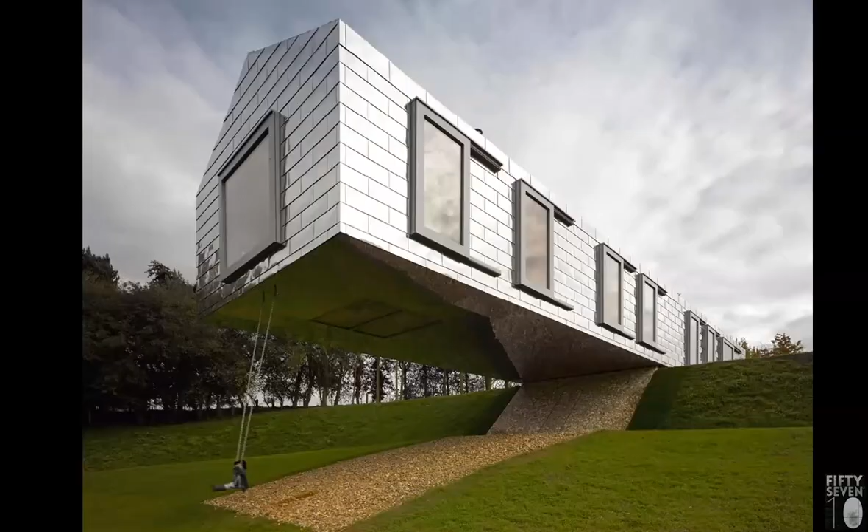Later, we turned social housing into something really good looking, perhaps. You could also say this is for Miami, but it's in Amsterdam, one of the worst neighborhoods, as a transformation project. We work on all kinds of scales, also really small - like here, this is one of only two things we've built in Britain. One is still standing, and that's this one. It's a holiday home for Alain de Botton, to actually get people that go there and rent it out. You could go there, rent it out, and you're supposed to talk about the architecture. We believe that this would actually cause some discussion.

We do public buildings as well, and also large-scale master plans. We also do interiors and gardening. So like you at the university, we have this idea that architecture should not specialize too much. It's really difficult in getting new projects, but we also believe that you can do anything from a vase to actually restructuring the entire planet, which was one of our more modest projects.

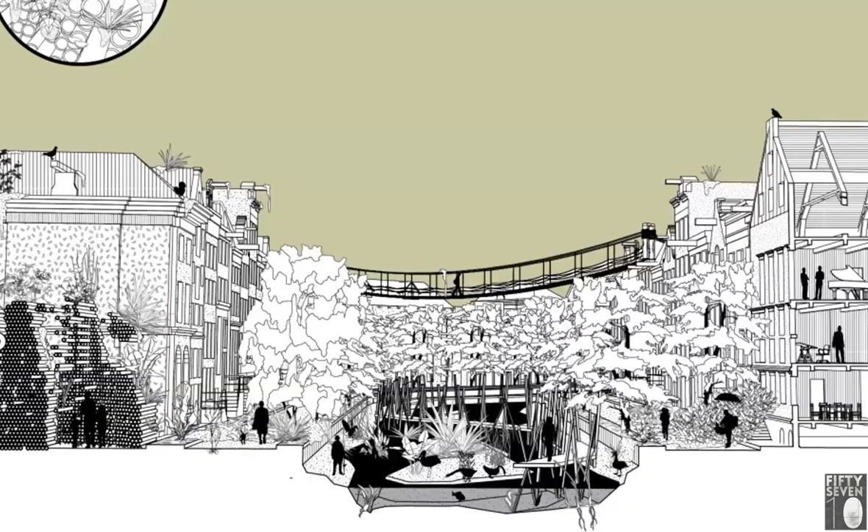We also run a university department at University of Delft. We call it the Why Factory, and they're dreaming about the future of the city. It doesn't have to be rational, but it has to be radical. So here, for example, is a project that wants to make Amsterdam a biodiverse city, with as many species and animals as possible together with humans.

We also publish books, and you can perhaps find them in the library. In the 90s, we grew up with this idea that resources are going to end - the warning of the Club of Rome, which is more relevant now than ever. We also knew that we were running out of space and resources, so that if we all would live like Americans, we'd need our planet many more times. In a very Dutch way, we then said, okay, let's not - in Germany, they always tell you we need to do less. We always want to do more, and perhaps in a better way, because otherwise it's not very optimistic, and we want to be optimistic.

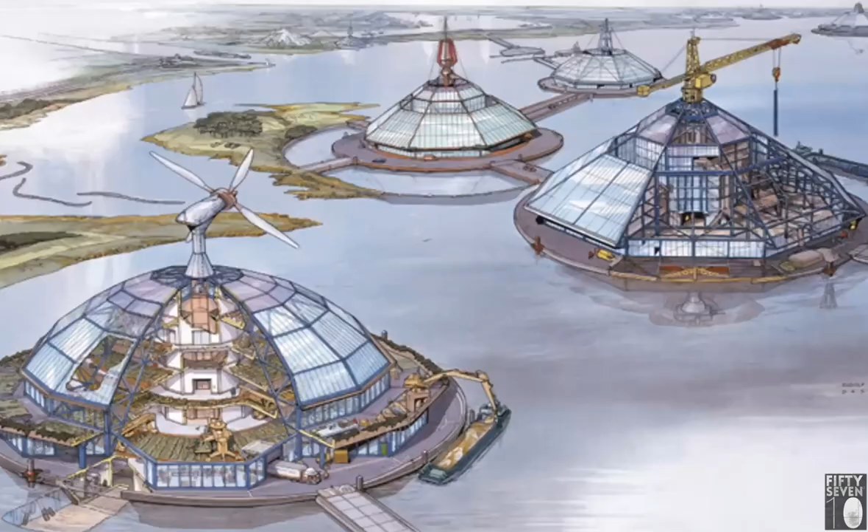In the Netherlands, we have this idea that you can shape society. We have built our own country, and these are two doors that actually protect Rotterdam - each door is as big as the Eiffel Tower. So there's a very strong belief in solving things with technology. Winy Maas, the founder of MVRDV, actually grew up with these visions of the future, that in the future, if the Netherlands are gone, we would all live in floating cities. So there is a strong belief that architecture can shape things and society.

And people live like this, and we believe this is a really bad thing. So sometimes we're a bit naive, and we want to put those two conditions together: suburban lifestyle together with density in the city. For many years, that was also our philosophy in terms of sustainability, because urban sprawl is extremely bad.

And if you have dense cities with high quality, you actually have a more sustainable city. This is the pavilion we built for the Netherlands in 2000 at the World Expo, a stack of Dutch landscapes. We tried to prove that you can create nature in an artificial way, like the Netherlands. On the 5th floor we have a forest. After the building was abandoned because of bad economy, the forest grew there for 20 years without being maintained. So it actually worked, and so you can make density also nice.

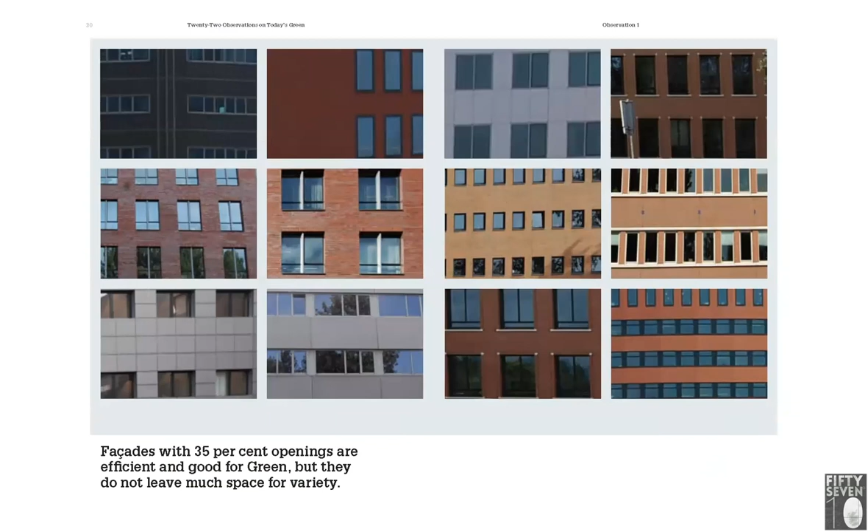You could have parks in your buildings and so on. Also, about sustainability, we have a publication called The Green Dream, saying that green buildings are often quite ugly. Here, for example, in Germany, you see this is not going to be loved, and it's not a good way to do it. Also, if you have only 35% facade openings, the buildings do not become more interesting or better.

So here we are trying something about beauty. Can you make energy production actually beautiful? These water lilies could be floating in Phuket—is it beautiful enough? We also dream about cities that are literally covered in forest, and that's not greenwashing, but is actually for biodiversity, to make it nicer. Here is a vision for Munich, which is now hanging in the mayor's office.

So we're dreaming. For us, sustainability is not just technology, it's really holistic. It's like water in a stream—if it cannot pass the stone on one side, it will pass on the other side. So every project needs to be really sustainable, but the way to get there is not one recipe. You have to find many things.

Here I show you one. For a dock workers community in the port of Rotterdam, we had to design a library, and we said: okay, this needs to be a place where the book is celebrated and advertised, because it has the highest rate of people who cannot read in the Netherlands. So we wanted to make a pile of books saying, come and read. And so we built the book mountain.

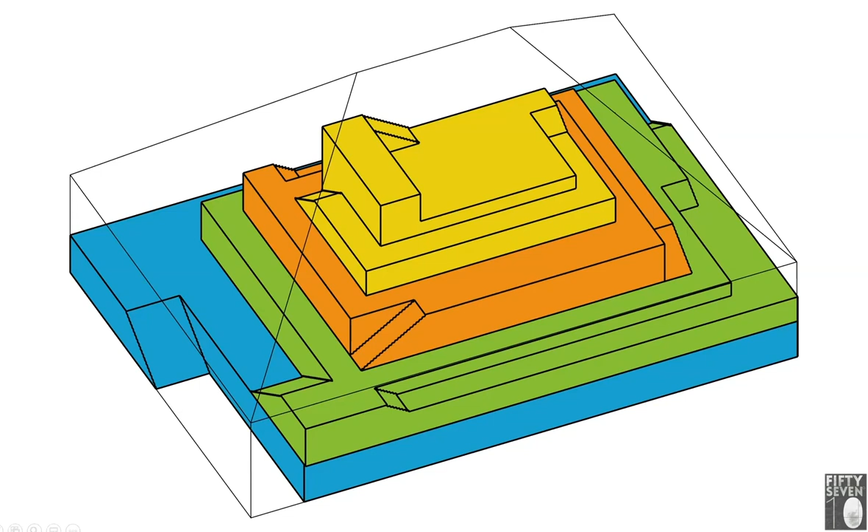We only have one entrance, and when you enter the building, you instantly have to take the stairs to get into the library. So that's the concept, and this is the book mountain as it was built. Sustainable technology is in there everywhere. Also, the bookshelves are actually made out of planters from the flower industry.

But the most important thing is actually that it's sustainable to the community, and that people are reading more. And it works very well. Many kids who don't have a home where it's quiet, because the television is running all the time, go there to do homework, and that gives them a chance in life.

And then, of course, it's filled with technology, and even the plants you see in the building are part of the sustainability. Basically, we harvest heat in summer and harvest cold in winter, and then use it to cool down and heat the building, which is a very simple and effective way. The system doubles also as a sprinkler—if it burns, in winter you'd have really hot water coming down, and in summer it would be cool. But we try to make it all disappear.

So the idea is not that it's a building where you see the sustainability, but here you need to see the books, because the books were the entire idea here. Also nice, the moment you walk up, you always have books around you, and we try to manipulate you to become this person that is interested in books while you are walking to all the other programs also in the building.

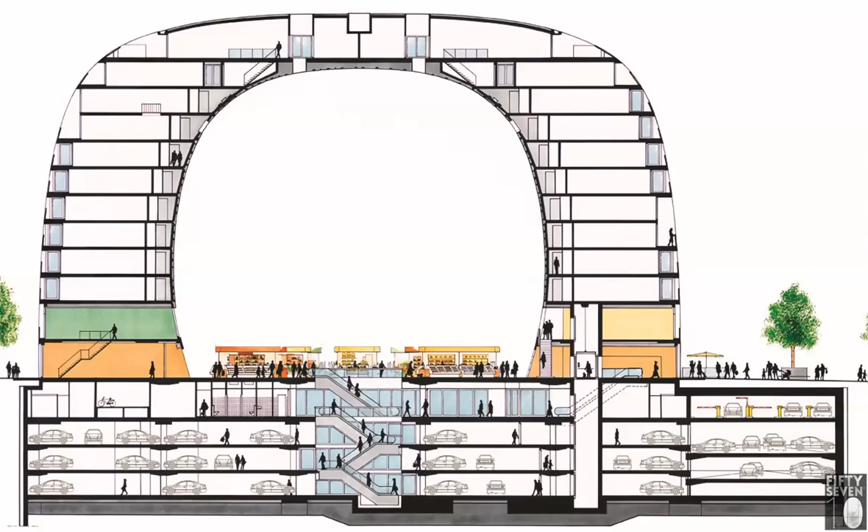So here, for example, we have one of the rooms that is looking into the market. The further you go up, the more the wall is at an angle, and at a certain moment you look down into the market. It's also mixed because this is actually social housing - 50% social housing, 50% commercial housing, and then 30 rich families on the roof, which is how things are as well.

Of course, we have BREEAM very good, but that's not even the best rating. It's not the best rating because we had to put a huge parking garage into the basement to actually relieve the entire neighborhood from cars. But the thing is that it's really loved, and if a building is loved, you have less chance that it will be removed.

And of course, in Scotland, you know all about it - I just read that Edinburgh has the most listed buildings in the world. Not building something is of course the most sustainable thing, and if you do not demolish it and you do not replace it, then it's also really good. So that is also in a way important.

Yeah, sustainability - if you leave it up to the market, which is a very British system where everything needs to be left to the market, it might not happen. So you also need very strong cities. Our politicians are asked to actually come up with good rules so that we will turn everything more sustainable.

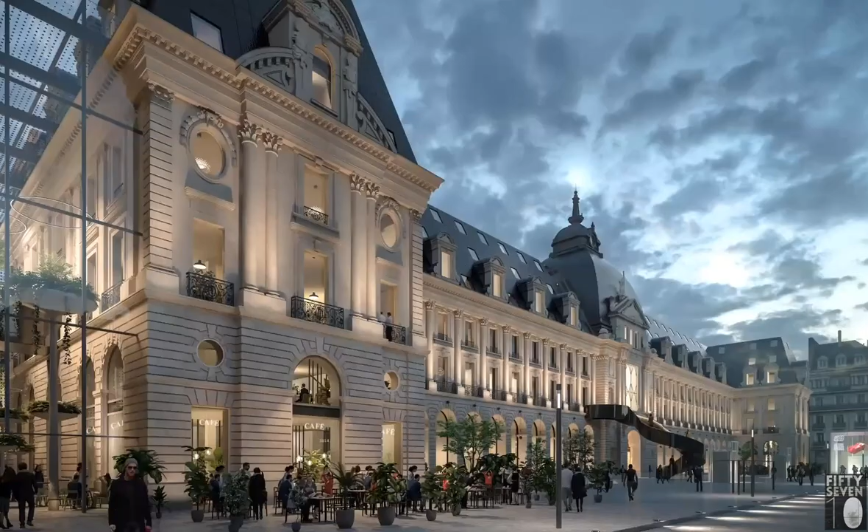And what's also important in our strategy for sustainability is transformation, transformed in one way or the other. We're trying to do that sometimes totally invisible, like this building in France, where we're not supposed to really touch it. So we touch it a little bit with some glass, but you won't really see that we did something - whereas it's perhaps more a challenge and more interesting for architects to look at this kind of structure.

Going back to this building, it was empty for 20 years, and whenever I went there, there was more decline, and more architecture students actually went through the fence. It was heavily forbidden in Germany, verboten everywhere - do not go here. So sometimes I came in there. There were two buses with architects in there, and whatever they did with the fences didn't work, the architects would always go in there.

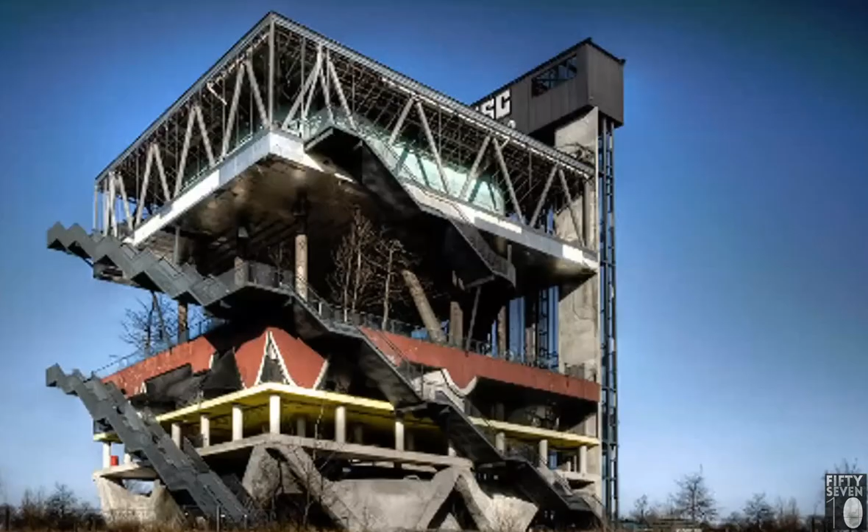So this is how it looks now. As you can see, it had its best time, and also here we were asked to actually make a plan for it. Because it's very expensive, we had to design student housing around it, and that would pay partly for the refurbishment of this building, which will be turned into a university quite soon.

And then, yeah, it of course needs now a facade. In the beginning, it didn't have a facade, but yeah, you need to change buildings.

Also very important, and I think this is perhaps the most meaningful participation we do in terms of sustainability - we work a lot in China. We have 55 people working on Chinese buildings, and of course they have built so much over the last 30 years, and this stuff was built fast and bad. If they start to demolish everything, then global warming will accelerate even more. So what we're trying to tell the Chinese in all our modesty is, please have a look at these structures, whether you can save them.

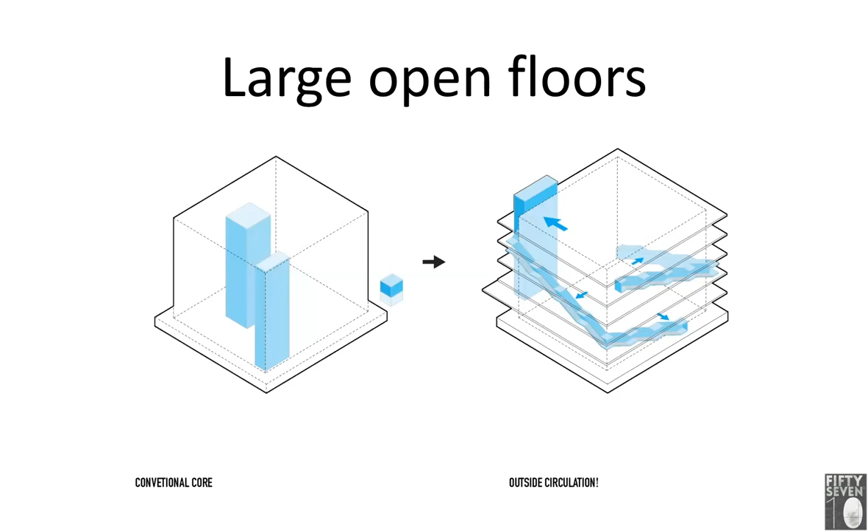Well, we were also only allowed to have 5 floors, so we made 5 double floors, and so you get a lot of light into these floors. And then we said, well, the tenants can then decide by themselves to put in furniture, which is actually, you know, mezzanines and so on. We called them the potatoes, because there was this potato powder factory there before.

So how is it used now? We have gastronomy, we have 3 layers of fitness, then we have an office - the Audi Innovation Center is in there - and a short stay. Basically there is this penthouse for DJs, because they can really have after parties with a lot of noise and nobody cares in this building.

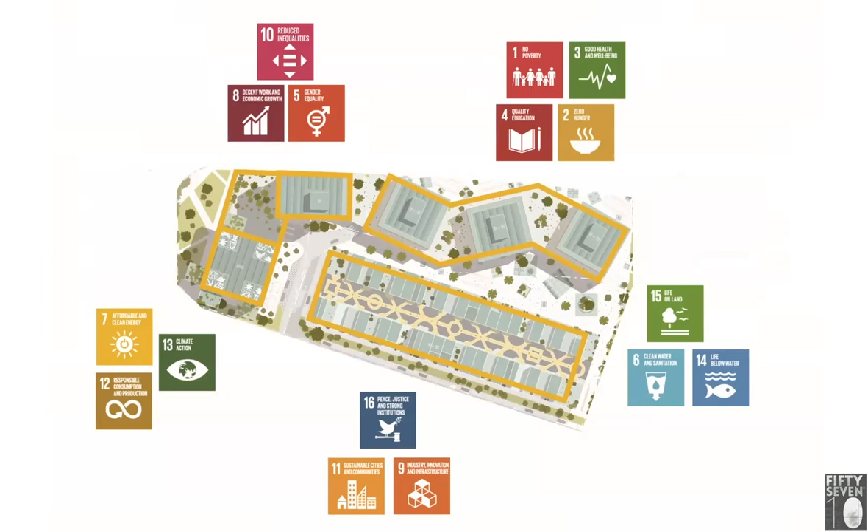Of course, we need to look at the 17 SDGs. Maybe you're working with them as well, but we're trying a lot. We have developed these toolboxes so that everybody in the office can see what they can introduce into the projects. We have all these certificates, but they're really not enough. So we're also looking into a climate pledge. We're testing whether we can offer more, whether we can promise more. If our tests are successful, then in September we'll roll it out and make an official pledge to the public saying that we will be more and more sustainable every year and exceed these labels as well. But at this moment, we're still in the test phase to see whether it's going to work.

Carbon is the most important thing, and all the other things you see there we're trying to put into the buildings. It's not always easy because we work all over the world, and sustainability in Sri Lanka means something very different from Germany or France. So that's also something where we have to be super flexible.

In order to do that, we have these software people, a bunch of guys - the first girl is now hired finally - architects that are also really good with software, and they're trying to help us along.

Here, for example, you see the Space Finder, which is super interesting. It deals with urban regulations and the potential of buildings. Can you do something to them? Can you densify them a bit more? So we want to go from these set rules in the city to perhaps more flexible rules.

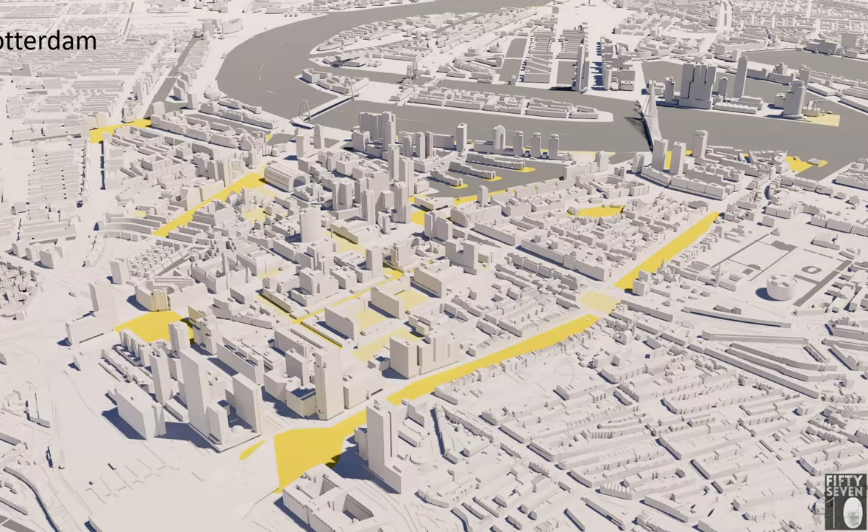We used Rotterdam as an example - this was the first test. We put the entire city center of Rotterdam into a computer model. Then you see in yellow the sunspots - these are all places in the city center that have a right to a certain amount of hours of sun. Then we look at the maximum height and volume that you could build, which is this.

According to an urban regulation, this is what you can build. But then another urban regulation says that you cannot have that shadow on the streets. So our software mediates between those two regulations and three other regulations as well, because we like our rules in Holland. And if you fully respect it, you see that we can still build a lot on top of these plots.

The plots where you can't build at all are all listed - that's where our market hall is, and we said let's not build on that. But it's really interesting for developers because they can see which plot actually has potential, and it's interesting for the city to check whether the rules work.

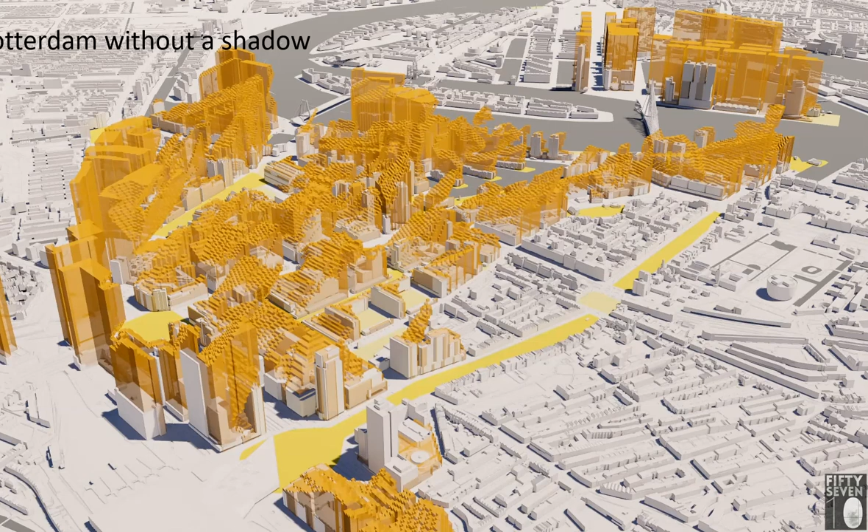When we showed this to the city, they were shocked that on the top part, where there's the word shadow, there is a mountain of buildings - and that's certainly not something that they wanted to do. So here you see high chances, low chances, and so on.

Another one our next team did - next is new experimental technology - is looking at carbon. Normally you make a design and then send it to an engineer, who then looks at the carbon use in the construction process and the maintenance. What we're trying to do is bring this further into our design process.

Of course the SDGs - three of them are the most relevant for architects, we believe: 11, 12 and 13. And 13 has to do with carbon. Here we look at the use of carbon - usually the carbon calculation comes way too late in the process to actually change anything, so we have to live with the design but find lots of things to make it better. Whereas now we want to have a prediction very early on in the design process, because we make many design options, and then we can also discuss how carbon works.

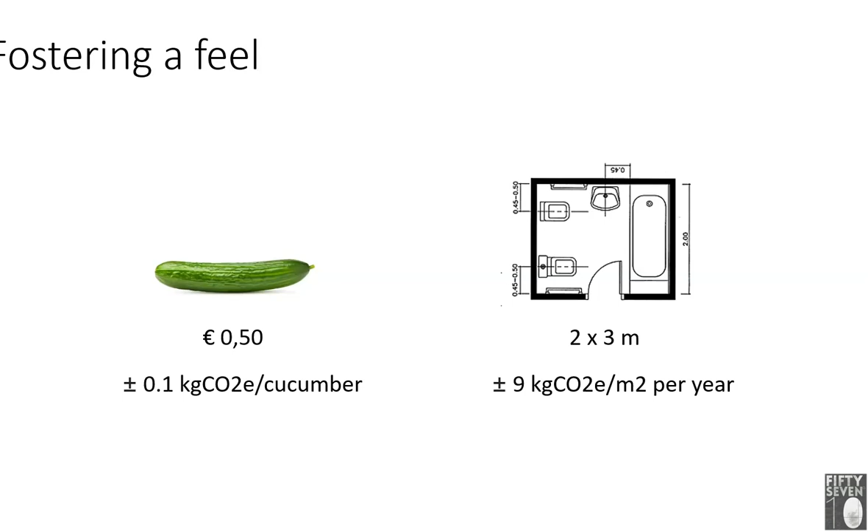So here, if you have this, now a bathroom, so much carbon a year, a cucumber, that much carbon - we know these things. So we put that into a software, and we are looking at the very beginning of the design process, the construction process. We then look at different buildings that we have done in the past and that others have done, and different elements and how much carbon they need, and also different materials. We put all this together, make our models, and look at all these parameters, and the software comes up with an estimate.

The estimate is a bit fuzzy, but it gives you a range. At least it gives you a range, and you can then see if option number 1 is better than option number 2, because the range is going to vary between these designs.

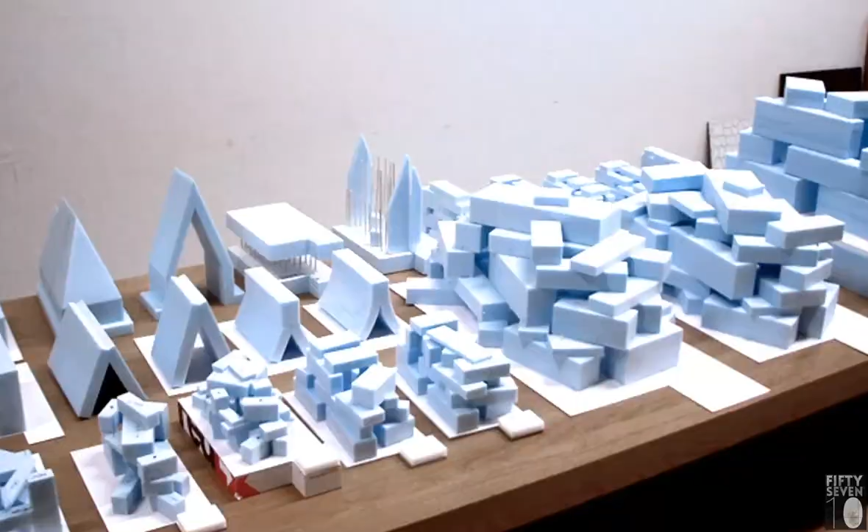Here you see a table of our early design phases, and as you can see, it can go really any way. We have here maybe 3 main ideas, 4, 5. But in the end, the stack actually did win, and for the stack in front, you see many different options. So we have a lot to discuss, and we used to discuss this based on all kinds of other qualities, and now we can also automate it. We can give each of these options a carbon label, and that can be also on the table then.

Yes, I want to talk a bit about the city, and I want to start really small. Rotterdam is the city that was bombarded during the Second World War and then rebuilt as a car paradise. Recently the city has decided to give less room for the car. So they built lots of parking garages.

One of them was in the market hall. That's also the reason that it has a bad rating, because it has 1,250 parking spots. So every one of them is a minus.

And this is the neighborhood where our office is. During COVID, they were sitting with this - you see, it looks like a parking space. There was no life left, and the shops would all suffer from this situation.

So they asked us whether we could remove the cars and turn the street into a pedestrian zone, bicycle zone, and also extend the shops onto the streets, which we did within 3 weeks. It was done. Also the city liked the idea. And that was a very new thing - that the store owners who normally want as much parking as possible said, get rid of the parking because we need more space. That was a very nice thing.

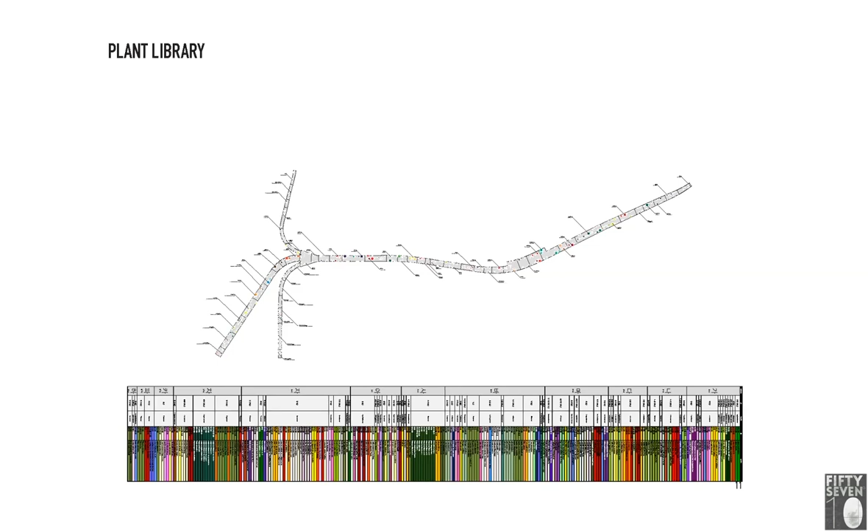The car is of course often a real problem, also here in Korea. We had this inner city motorway—it was crumbling, so it wasn't safe enough anymore for cars, but it was safe enough for people. So we renovated it, and within half a year we were able to turn it into a park. We did that with a lot of data, so there was scripting involved again. We have from A to Z in the Korean alphabet all the plants that grow in Seoul, and we put them into planters because the bridge wasn't strong enough, unlike the High Line, which is a very strong bridge that can hold half a meter of earth. We couldn't do that, so we had to work with flower pots.

The buildings on either side of this park changed in value, because there used to be this idea: more cars, more value. But today we know that in certain places, if you have more people walking, you have more value. This is the amount of money invested into the bridge as a park, and then this is the amount of money these buildings actually gained in real estate value—that's something that's really great. We also saw, for example, in the center of Madrid, that if you get rid of cars, even the turnover of the shops could go up.

Now, can you also do this on a larger scale? Because of course it's easy to do this in an inner city where everybody can come to. Oslo is one of these booming cities in Europe, with a lot of new people moving there, and they anticipated they needed a lot of new infrastructure to deal with this. They asked us to come up with a vision, because we were planning a super big development for Norway—360,000 square meters of mixed use, which is as big as one building in China. But for Oslo this was a really big thing, and they wondered how they were going to deal with all the traffic that would be attracted here. That's not the kind of city that we want.

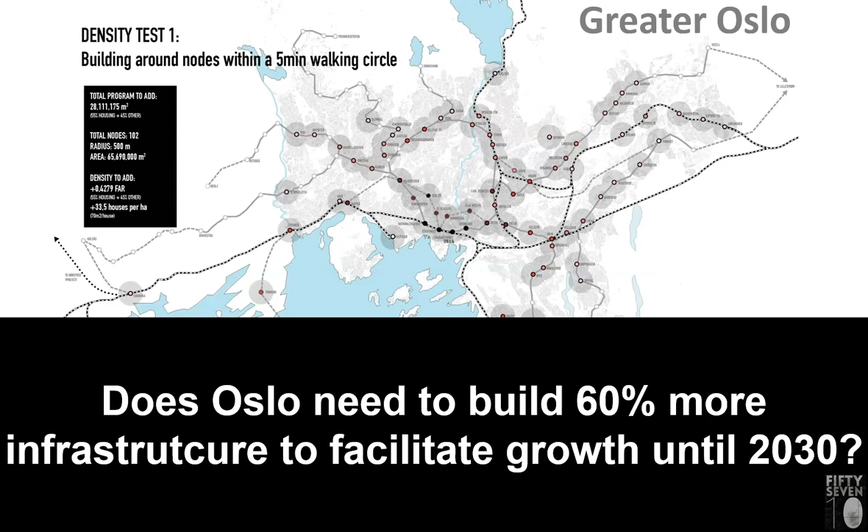And what we then found out is, now we looked at all these metro stops - is there any space left? We made about 30 different researches into metro stops. The circle is a 5-minute walk around it, because that's the hottest area to densify. And here we found, for example, a river that was not so nice, and you could perhaps densify there.

We made all these different ideas for the city, and then it's a decision of the politicians whether they want this. But at least we said you could do this if you can find the citizens to be on your side, because on one hand, the neighborhood might become more densely populated, but that also gives more services. And on the other side, the city doesn't have to invest. It could host 1 million new citizens without investing into new infrastructure.

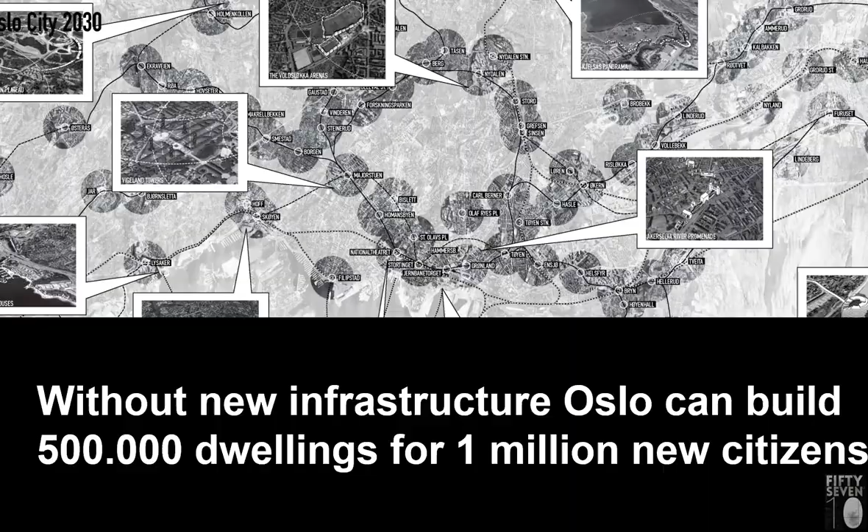And we tried to do something like this also in Glasgow, but that was very, very difficult. Because most of the streets are not even something the city is allowed to talk about, because it's kind of national roads. So pedestrianizing even one street, putting trees into one street in Glasgow is almost impossible.

And we had this Your City Centre project in Glasgow. At a certain moment, we sent this big letter to the mayor saying it is impossible that a big city like Glasgow has only one person working in the urban planning department being responsible for the entire city center and has to facilitate investments. So there was very little - we felt, from a Dutch perspective - interest in the public good, and a lot of interest thinking that if you attract investors, it's good enough.

So there is a faith in the power of the market. Even in Scotland, we were quite surprised. But the project is still going on with one of the offsprings from our office. So there is still hope, and hopefully it will one day look like this.

Because I walked through Edinburgh this morning, and you have all these gorgeous buildings, all listed, and in front of them are nothing but cars. It looks like a Morrisons car park. And it's like, really, is this how you want to treat your city? That's really sad in a way, no?

And many places have done better. This is a wonderful piece of inner city in Lyon. Here we also said goodbye to all these car parks and tried to give it back to the citizens, turning this into much more also shopping centers that don't just absorb people, but that you can actually walk over the shopping center instead of having to move in there and turn eternal loops until you forget where you are.

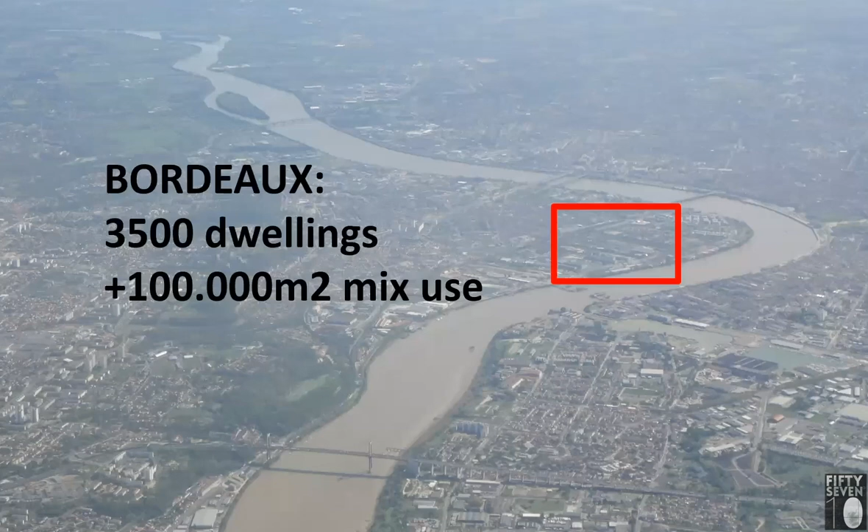So here, for example, I take you to Bordeaux, which is a UNESCO World Heritage City. On the other side of the river, there are old factories, and the city wanted to plan 35 hectares, 3,500 units, and a lot of mixed services. They have tried this before and didn't really succeed.

So they were able to build this, and it looks a bit suburban. People don't really live there, they sleep there. So how could we turn this into a better neighborhood? We have lots of old buildings there.

Bordeaux has already tried to build the city of the future. It didn't really work out. It looks really cool, though - you should go and visit it. The problem there was that the pedestrians and cars were strictly separated from each other, very noble, but the pedestrian areas lack all kinds of social security and feeling.

Now the old city is really good again, and when they asked us to plan the new city of the future, they said, can you please put the qualities of the old city in there? So that was the idea.

Then the first thing you do, if you play for God, you don't just look at maps, but you also go there, you talk to the neighbors, and that's what happened there. Winy went there and he actually drank tea with everybody. Then we had lots of events asking the people, what do you want? What are your ideas? And so on.

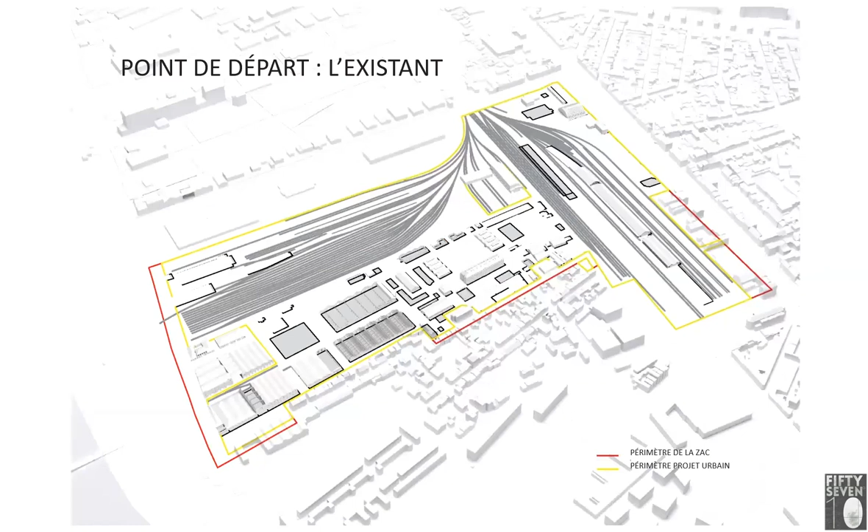Here's the site in Bordeaux. It's two old container stations and barracks from Napoleon. It was closed for a long time. And we said everything on the site is holy. You can never remove anything. So that was the start. Do not remove the history.

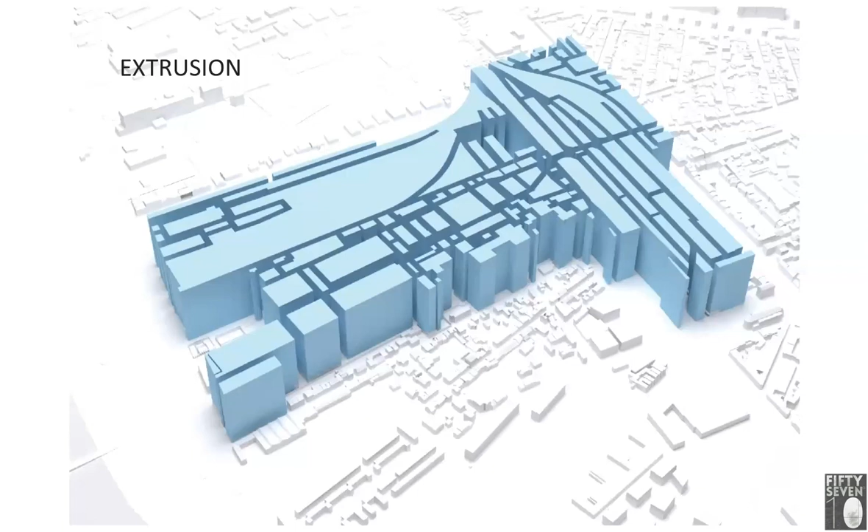We then, and that's where the mayor is getting really scared, we move up with parametric software 100 meters and say, okay, this is the basis. It's like, oh really? Because on the other side is UNESCO and they didn't want to see this and so on. So then we make cuts with this parametric software so that you have sun, and we cut it even a little bit more so that you have sun also in winter, 2 hours in every ground floor, so that you could also have housing there. And we contextualize it because the neighbors didn't want to see any of it.

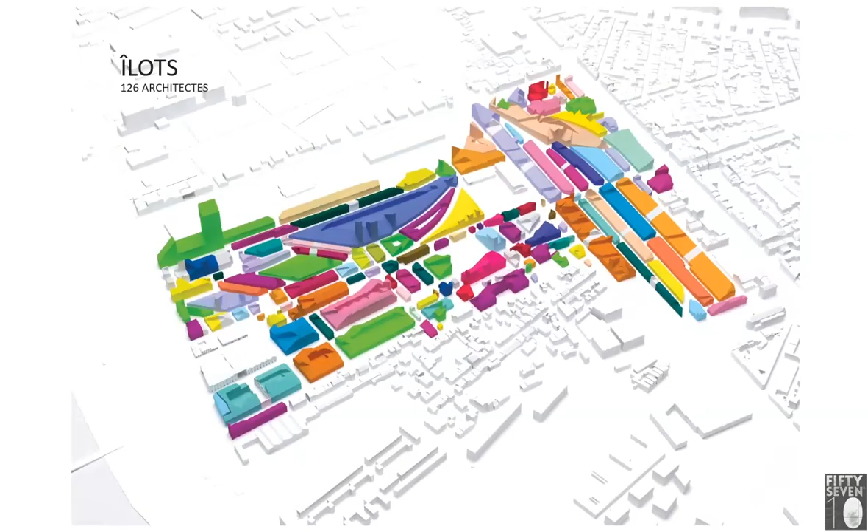So we made sure that from any garden of the neighbors, you cannot see this entire new plan. Then we divide it into plots for 126 architects, because if we would build everything, it would become not so lively, huh? Because we're only one architect. So you need diversity. This is how it looked like.

We also opened the place so that people could come and have a look for the first time in 50 years. And then this is how it would be in the future with this parametric architecture. And it turned into an urban regulation, so you can never cut off one of these corners. So as an architect, you have to work within this.

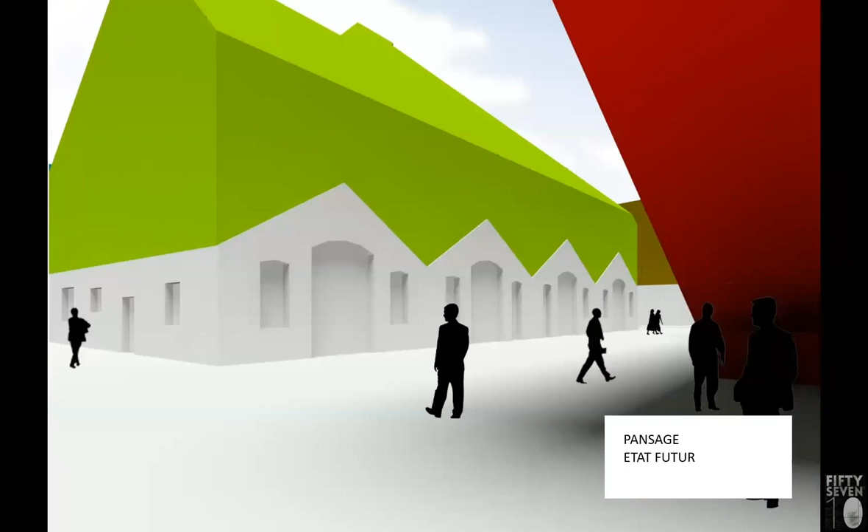Here again, the stables, how they look now and how they will look in the future. Now then, UNESCO - everybody was very scared what UNESCO would think, because this is how you see it from the other side of the river. And the mayor said, this is a green curtain and you cannot be visible above the green curtain.

So, okay, we went to UNESCO with two plans. Everything was cut, so that was really invisible. But we showed only our first one and they actually loved it. I said, it's like a modern version of the medieval city and people will be surprised what's going on the other side. So let's go for it. And it did not make them angry. And you know that Liverpool actually lost its status, so they're not always so tolerant.

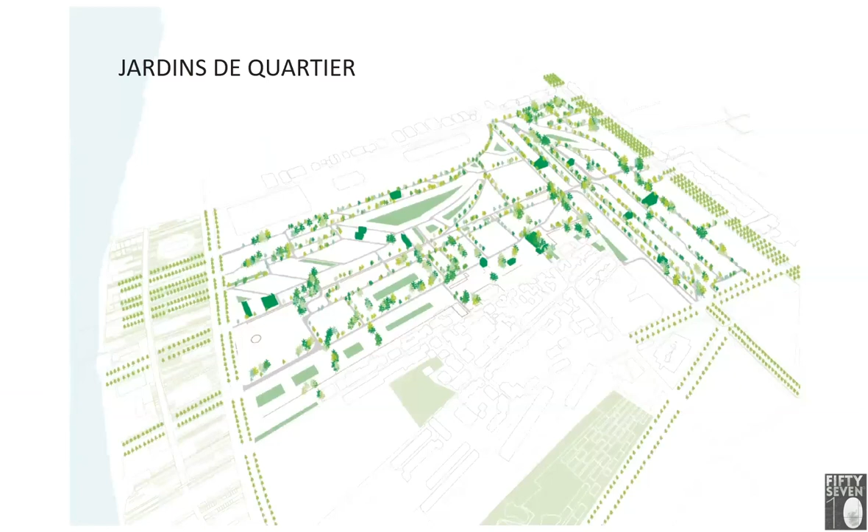Then we made an art installation that you could actually walk through and look at it. And now we then started to design the public space. Also here, we didn't want to have too much monotony, so it needed to be very diverse. A botanic garden with lots of different plants. Costs a little bit more in the maintenance, but means also that if there is a disease, not all the trees will die in one go, but only a few.

Then we opened the site. It became a really cool place. So if you ever go to Bordeaux, go there. Enjoy the cinema, the art, and the very, very expensive eco supermarket and bar.

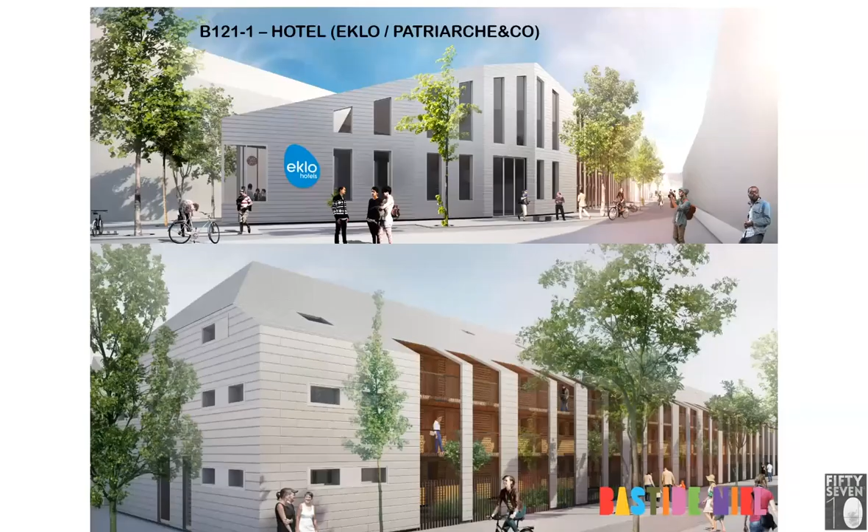And the first architect started, well, in one of the most boring plots, perhaps there is a hotel because it needs a repetition, but others are really exciting, as you can see here, these mountainscapes. And what's so nice about these corners is that you cannot make the same apartment over and over again, which also means that even in a small building like this, you might have students, families, old people living together, because the fill-in will demand all kinds of individual apartments.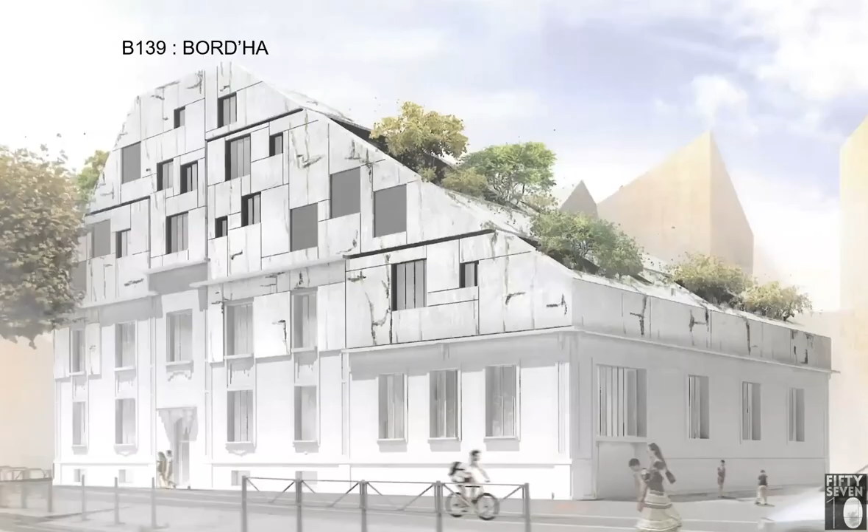And this is how this architecture actually wanted to make it look like a bit like a ruin, but very nice. Here they built a glass house.

And here we made a big concession. We said, okay, for this combination of swimming pool and housing, this is the one place where you can actually remove the old walls, and you see them still in the outline, but it was better actually without the walls than with the walls. But the history is still a little bit there. We're building this thing that looks like a football has fallen into it, the Vallée Verte.

And recently we did another one, and we have again a problem with the car. So many of these buildings, they need to house car parks underneath, but that's not everywhere possible because it's a flood area where the basements are used to make way for the river. So you can never go into these basements because they flood from time to time.

And so we said, okay, we need a car park, but it shouldn't be visible from the street because that's not nice if you walk past the car park. So they should be like wrapped in apartments at least.

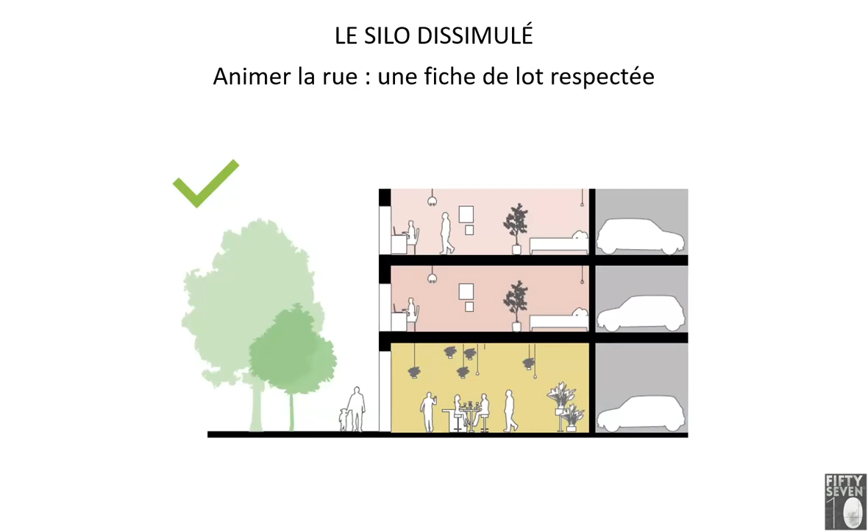And also in the future, we might, you know, the mobility challenge in Bordeaux, maybe we don't want to have that many cars anymore. And so we designed this big building in a way, you see here a greater car park, but in the future you could actually remove the central part because it's made in prefab and it could be reused somewhere else. And the apartments on the side, the ceiling height is a bit higher, and then you can refurbish them into apartments. So this is the future of this building with a lot of parking.

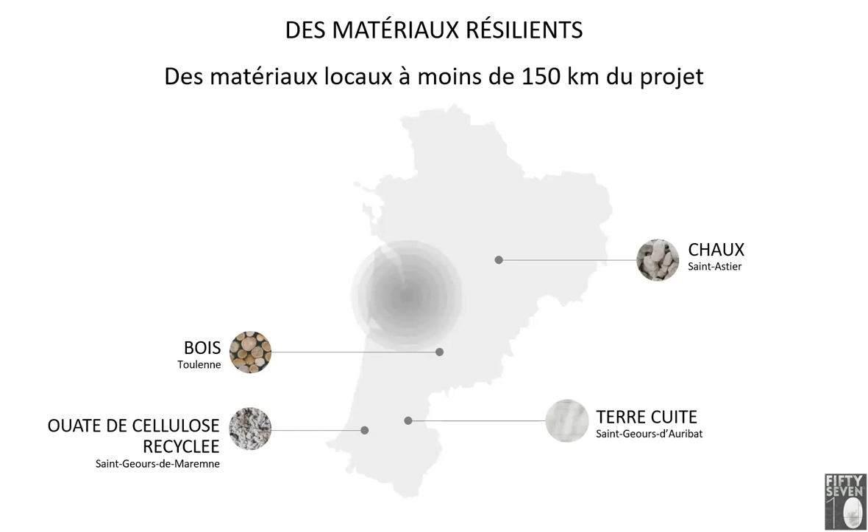And yeah, this is now underway. The other thing we said here is that nothing that we use in this building can be further than 150 kilometers from the site. So also that's really interesting. And it's very helpful because in Bordeaux we have a green mayor and he says that this needs to happen. So then the developers also have to understand and apply these rules, which is really cool.

And here you see lots of different apartments, again, because of the irregular shapes. You will have lots of different lifestyles, and therefore you will have a section of the population and not just one full building with students and one full building next to it with senior citizens. These things are super important so that we do not end up with a way too polarized society. If you meet each other in the elevator, maybe you start to talk and it's not your socio-demographic group, then perhaps this is the start of more debate.

Right, and then the first buildings are now done, and you see they're really big, but they kind of fit in. They try to fit in at least. Here you see them from the other side, and it actually works.

That's my son being totally annoyed that he has to look at architecture again. But you see how this is one of the biggest plots actually. It's massive.

And it works, yeah, all works with these very, very strange angles and this parametric architecture that is quite unique. And yeah, here they tried, I'm sure you can see this part, they cheated a little bit. No, they made a really big balcony where there should have been an apartment, but it also gives a certain quality. So we, in the Q team, we said, it's good, let's do it.

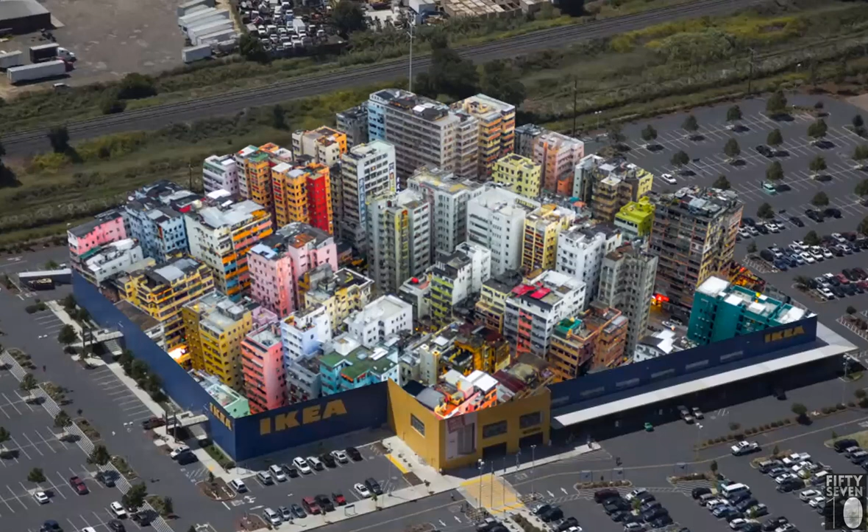Also in these touristic areas, you have these supermarkets. This is a supermarket from a German town - it's Lidl, a German supermarket, and this building is one of theirs. They build it everywhere in the world, also in Tuscany. Here you see the same thing. This German building is one of the biggest export products in architecture from Germany, and they're allowed to build it anywhere. If you and I wanted to build anything in Tuscany, we would have to apply very strict rules - terracotta, the right stone. But Lidl is allowed to bring this German building right into Tuscany.

The nice thing is that in the future they can do a lot of good things with them, because Tuscany is a place where it's not easy to build, but I think we will all be very happy if they densify this Lidl and turn it around.

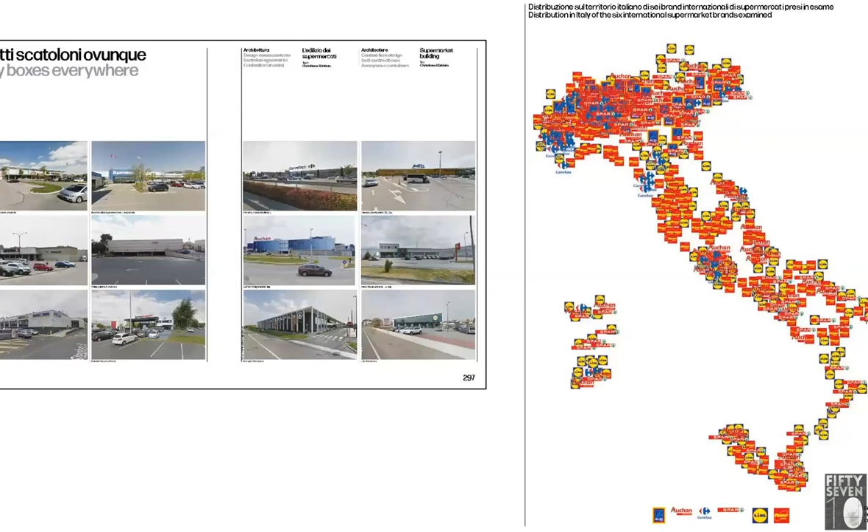You could, of course, continue this with DIY stores and all kinds of large other things. So perhaps this is the one moment where you can actually change this part of the countryside. In a place like Tuscany, where you absolutely can't build anymore, the Lidl might be the place to do it.

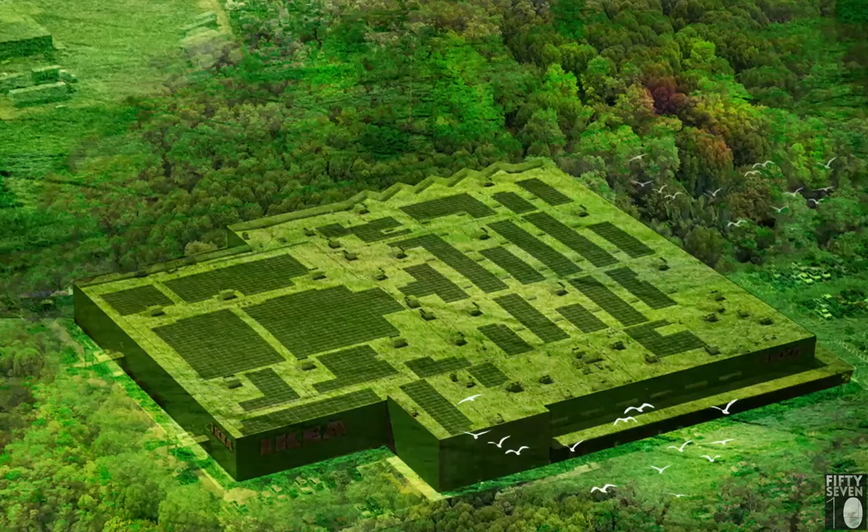Here we're back to IKEA, and maybe we can do the green dip - that's something we dream about. You take a building, you dip it into glue and then into a forest, you take it out again, and it's green. Not technically sustainable, but green is good for biodiversity and so on.

Here in Jakarta, we are trying to do this with a shopping mall - you go in and it's nice and cool, and outside there's a jungle and a lot of shadow, so you don't really see it. What you see are green mountains. That's the dream. Of course, it's good to have a park on top - we're trying to do that too.

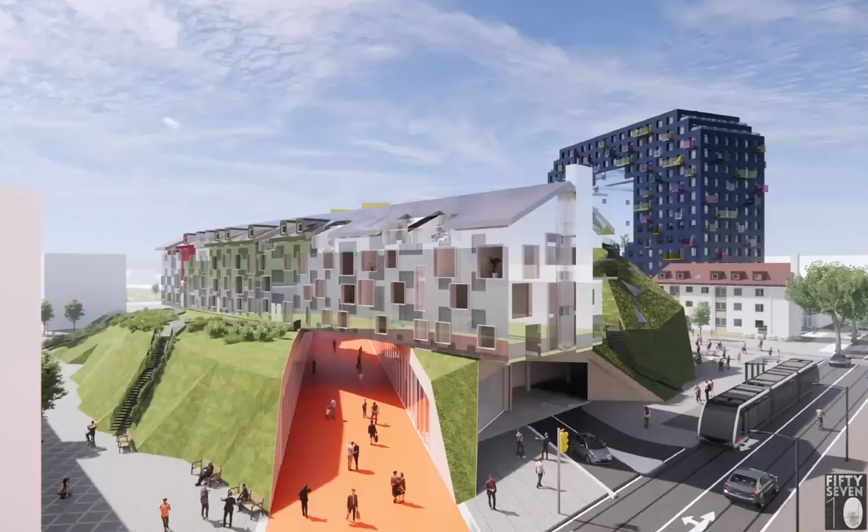In Germany, you see one of our projects where we actually bury a Lidl and a drugstore and all kinds of things, and put a mountain on top. This is going to be under construction quite soon. It's on American barracks, and the building you see on top is a monument for the past of the barracks. So we took one of the ugliest buildings in the world, recreated it on top of this hill, and told this area, look, this is how it used to be - but we executed it in wood and glass to make it a bit nicer. In the future you can walk all over the Lidl.

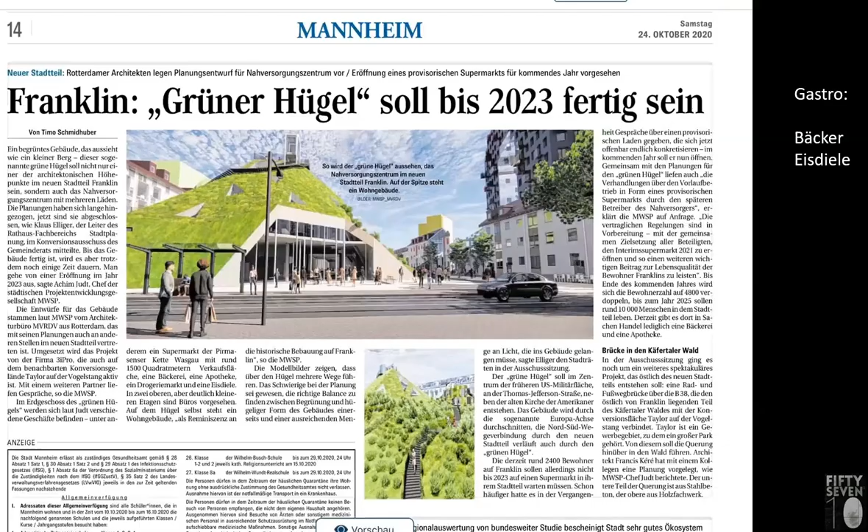Well, I talk a lot about Lidl, but they're actually in a good construction program these days, and they're perhaps even trying to be more experimental, so it's a bit mean of me.

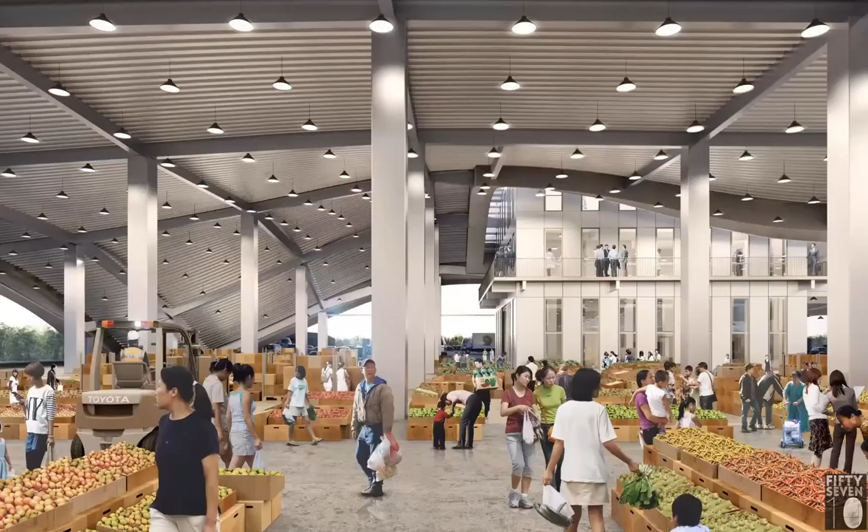Back to this one - what about agriculture? Because there are really big boxes, could we have fields on the rooftop? We're trying to do this in Taiwan, one of these wholesale markets where large trucks come in and out all the time. Instead of a box with a metal roof that increases the heat, we have an undulating roof with a lot of fields. On the weekend it will turn into a tourist market. This is from the top - you see the building that's going to be a restaurant, and the roof will provide the food for this restaurant. That's the idea. We're quite far now, it's under construction, and will actually be completed this year. They haven't found farmers yet.

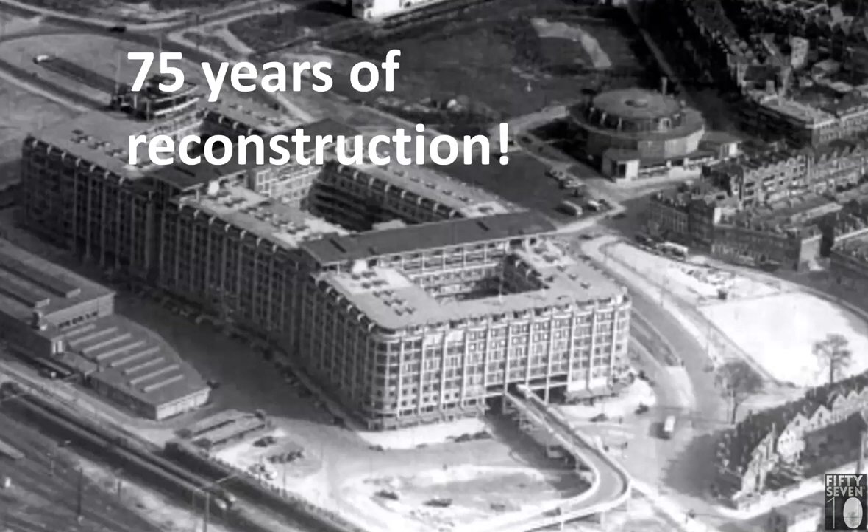That's a bit difficult. How do you give an impulse to the city? That was a question that came to us from Rotterdam. They wanted to celebrate 75 years of reconstruction after the war. One of the first buildings is the wholesale building you see here, built so businesses could start up again. It had a great roof with ballrooms, so people were dancing, there were restaurants, a movie theater, and all that - of course, 75 years later, was totally forgotten that it existed.

So we drew this stair. On the other side, you have Central Station. The idea was that you just have a stair to celebrate 75 years of reconstruction. And that was all. So we made a render and we walked around with the render to everybody in the city, saying, should we not do this?

Isn't that cool? The mayor said, well, that's difficult because this is the security zone, if there should be anything happening in the station. But somehow people wanted this and it worked. We made it out of scaffolding, and it was built in only 3 weeks.

And then suddenly people could walk to this roof, and you see there on the roof, this is the old movie theater, which was reopened. You couldn't do anything but walk up, and 1,000 people every hour tried to do it. There was a long queue to actually go up this stair.

In total we had 350,000 visitors, 1,000 per hour. It was amazing what happened, lots of parties. It was once covered totally in fruit for whatever reason. There was Holland's Next Top Model, which of course didn't make it. Even the winner didn't become a new top model, but they walked down there. And also the hooligans of Feyenoord football club, they were there and they loved it.

So everybody loved it. And then there was so much love, and it was such a cool project, because afterwards we could dismantle it and use it again in other places. So it was also a party without garbage.

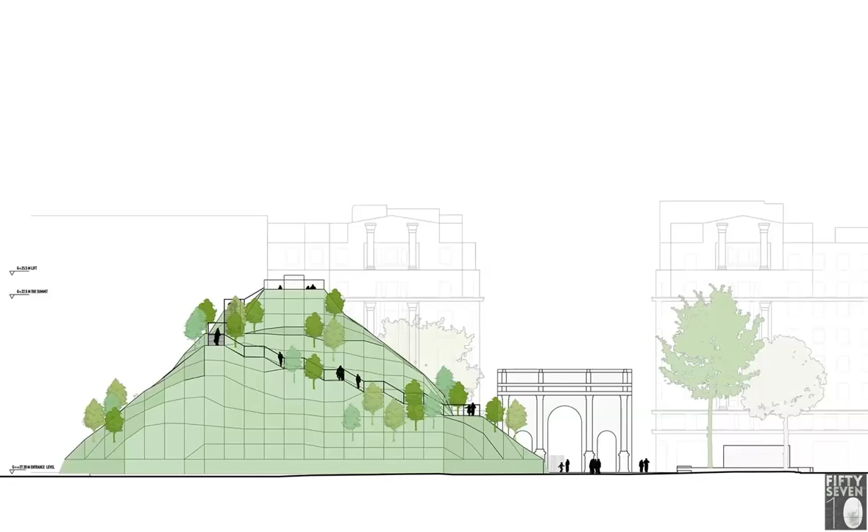So Oxford Street was heavily hit by COVID, and we thought that the Marble Arch Mound would be the best solution for this. And then somehow, yeah, there was a lockdown. We couldn't go there. The co-architect wouldn't talk to us anymore, and it was an incredible disaster. And we have never had more press than with this building.

And probably you can visit me there then.

But the thing is that what we wanted to say is densification and greenery in the city is super important. And for Rotterdam, for example, recently we made this manual on how you can reuse the roofs of the city. This book is given to the owners' societies of every building in the city center of Rotterdam, with the request to look at how to reuse the roof.

And then after Marble Arch Mound, you think we're done with these parties, but no, this summer actually in Rotterdam, and I hope you can all come there, we're going to open the rooftop walk in orange. So you can walk over the roofs and you can see the first projects that are actually refurbished roofs.

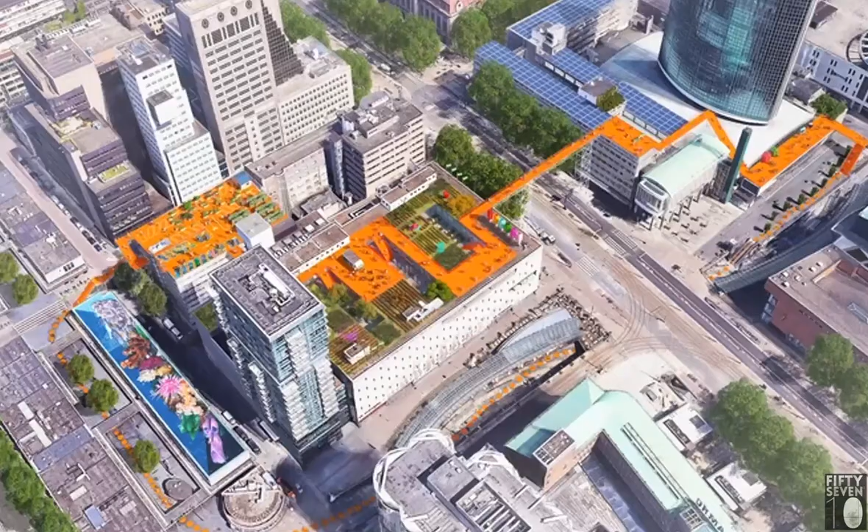It's either a water buffer, it's public, or it's just green, so to reduce the heat island effect, or it's energy production. One of these four things every roof in Rotterdam should actually do. And also the Architecture Institute, the former Architecture Institute, will get a rooftop from where we actually will talk about the future of the city.

So yeah, I have to be a bit faster because I'm almost through my hour.

Skyscrapers we also like to look at, and we like Europe a lot, even though the skyscraper is something from America and Asia at this moment. The biggest are being built in Asia, so you could say it's not a European typology anymore. But the question for us was, can we actually build a skyscraper with this kind of quality, at this small scale?

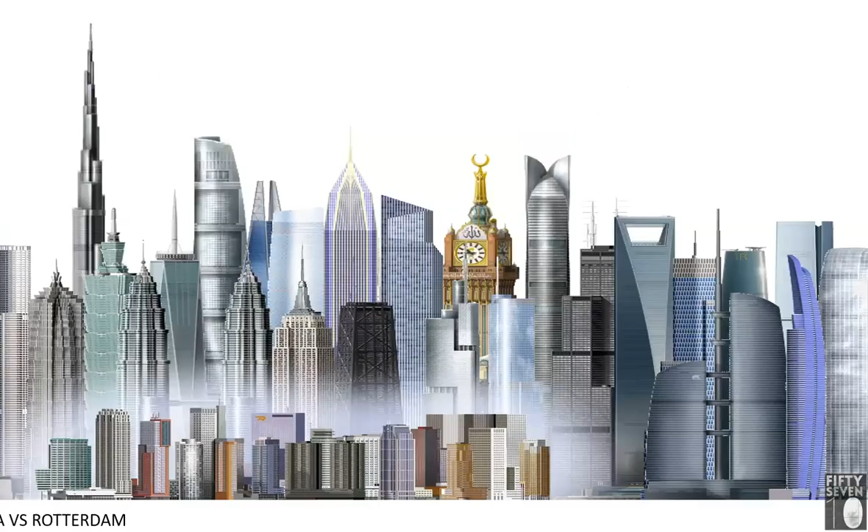Well, if you look at the Dutch skyscrapers, you have them all here. They are very nicely designed, but they're also just boxes with nice facades, and that's it. If you look at them in context of the Asian skyscraper, you see that we're not more than the plinth of their buildings. So the sky apparently is much lower in the Netherlands.

So at the Delft University, we then looked, how can we do this differently? How can we improve this typology? And we started to work with voxels, which is a little cube. We started to build a model of a skyscraper in Lego. It was super easy, as you can see.

What we saw is that it's a really stupid thing: you go in, go up, and look out, and you might or might not meet your neighbors, but basically you're all facing each other with your backs. So if we change just one stone, you can walk out, look back onto the building, and maybe invite your neighbors for a barbecue.

That's the idea. Then you put this into the scripting software and let it go wild with parameters, and you end up with towers that look like this. That's really cool, because suddenly you have the same quality as this Italian fishing village—people can see each other, talk to each other, go outside, and so on.

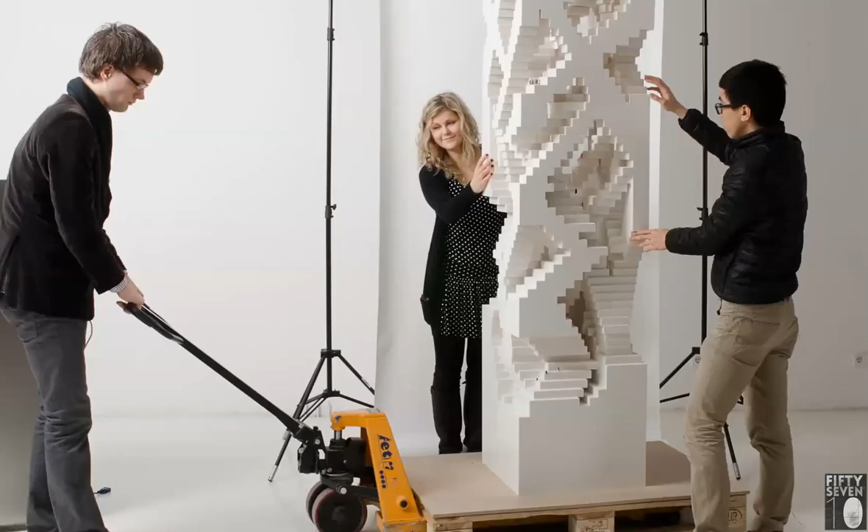The students then asked Lego for 1 million Lego stones. They were super nice and brought them to us. Then the university said you cannot build the towers too high, because students might die if one collapses—so here you see the maximum height we were allowed, like in real life regulations. These towers were then moved to the Centre Pompidou in Paris, where you can see them.

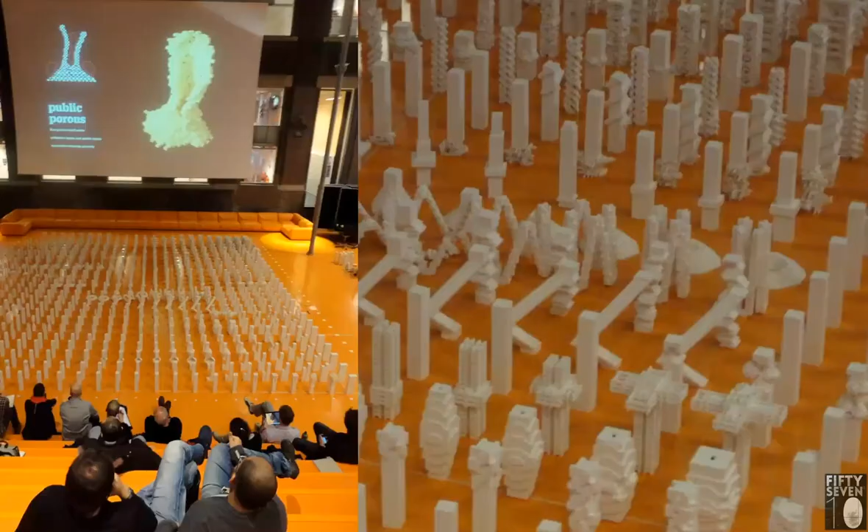But our research wasn't done, so the students continued and made these fields of an incredible amount of European skyscrapers. If you need one, you can get them—they're still at the university. And we got another million stones from Lego, super nice people there. So we actually designed them all and made a publication called Porosity, to bring porosity into these closed buildings.

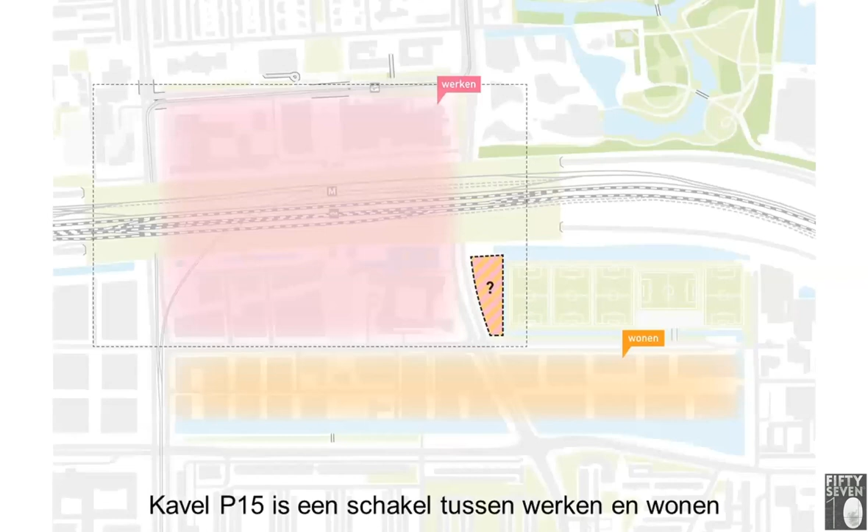So that's the theory—would this also work in practice? At that moment we were asked to make a proposal for one of the last open spaces in Amsterdam's Central Business District. It was a very odd site with housing, offices, and sports, so a bit of nature too. The city wanted to include it all because it wasn't such a nice place and they had a lot of ambition for it. So we said, okay, we'll put it all together.

Here you see we weren't allowed to fill this—this is the maximum volume, because we couldn't build that many square meters. So we said okay, we have a big plinth with shops and offices, then housing on top, three towers. We gave them a human scale, which is good for all kinds of qualities, and public space where you can actually walk around the central tower—up five levels, around it, and then down.

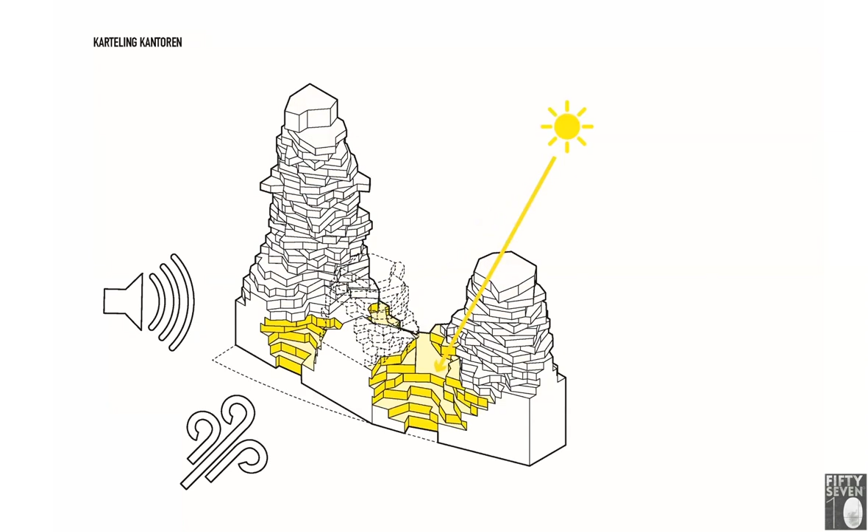We called it the Valley, because there was a valley in between, and then you connect it all. Also really cool is that the offices can be transformed into housing in the future, so the cores are already prepared for that.

Then we wanted to make it totally green—the green dip—dipping it into a forest. Piet Oudolf, the garden designer of the High Line in New York, said that's nice, but it's a bit difficult because we have all these different climate zones. So we have a plinth with a museum and a lot of public program, and of course a restaurant on top. This is how we designed it and hoped it would actually work.

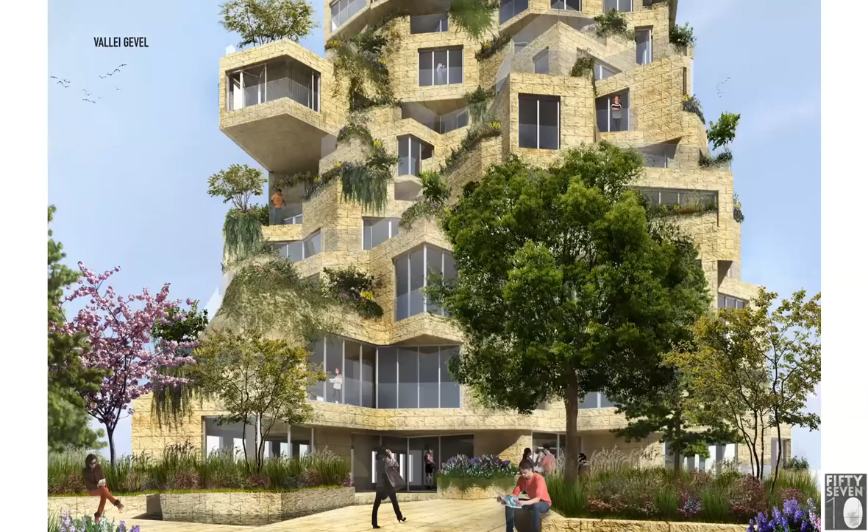And everybody said this can never be done—I'll get back to that, because our scripting team actually made it possible. But you see here, this living room, for example, has lots of facades. Facade is expensive—is this all feasible, and can you also make it green? So we have 4 different climate zones in the building, going from the Netherlands up to the Alps.

So you made this design, and then the scripting team put it into software to have it optimized. Here you see 80 different options for one of the towers—the green ones are the best compromise between all these parameters, while the red ones are really poor. So all we did then was find 3 of the green ones and put them together in the building.

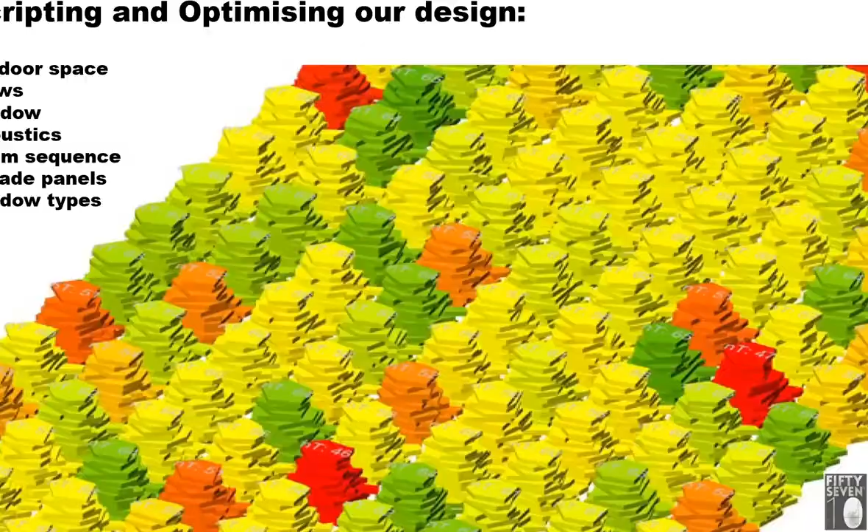One of the most important things we then followed was to make it more economic to build. The scripting software looked at the natural stone on the facade and how to make it look right. We had to go for an irregular pattern because that worked better with the irregular shape of the building. We had a very detailed Revit model that we used, then imported it into Rhino as lines, and got rid of a lot of information.

In Grasshopper, we made scripting that gave rules about the way to use the stones. We start with 1 stone, and the idea was that the scripting software makes sure there is no waste at all, so that whenever you make a cut in a stone, both parts can be used, or all 3 parts. We did that with 44,000 pieces of stone, which was then imported back into Revit, turning lines into 3-dimensional objects again.

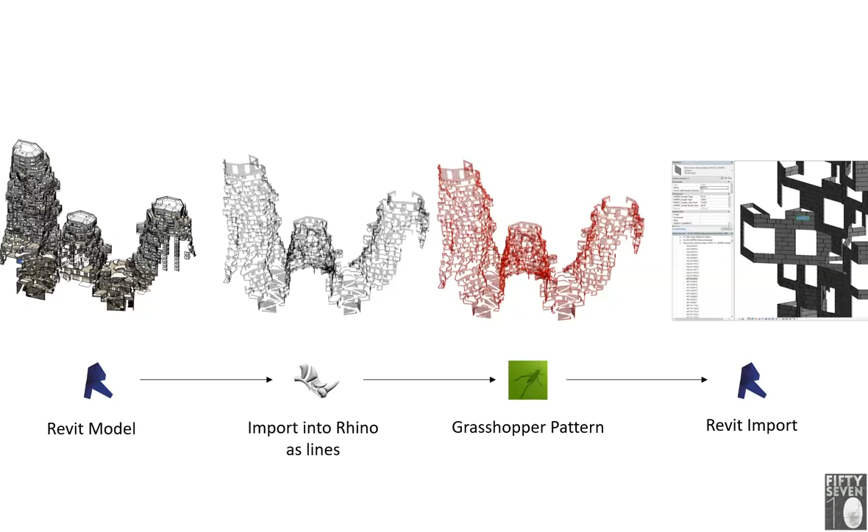They were then cut in Italy, numbered, and put into crates per section of the building. The construction workers could basically work with this almost like an IKEA manual, showing how to build this thing.

This now sounds like architects are not needed anymore. That's not the case. The first idea was by a human, and then even these computer-generated facade patterns had to be checked. Here you see, for example, 3 mistakes. So somebody checked the entire building, whether it looked good, whether there were no mistakes by the software, and so on. This is how we realized it.

And the price is very low. I'm quite sure they're more expensive here to build, but we were able to build this for 1,750 euros per square meter. This is a building where everybody said this cannot be done, it's impossible to build this. The scripting software actually made it possible to build it.

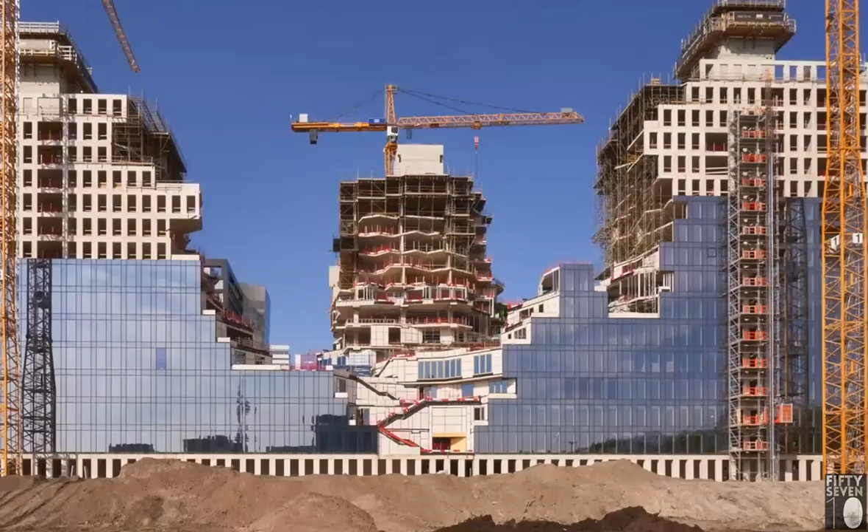We then built it. On the outside we have a glass facade because it reflects the offices. On the inside you have the human scale. This is now how we are almost done with the building. You see the first plants are already done.

Plants are super difficult. The Bosco Verticale in Milan was delivered with small trees, and today, 5 years later, they are quite big. So we have that problem too. We couldn't prepare the plants anywhere because it's a hostile environment, so we start with really small plants and they have to get used to the wind, the drought, and so on. In the end, it will look green like the render, but not for the next 4 years.

So lots of architecture critics will have a lot of fun with this building, and we hopefully invite them in 5 years and say, look, you were wrong. But still, it's very nice.

And you see this idea of a community here. If you stand on one of the balconies, you can meet lots of neighbors and hopefully invite them to barbecues, and perhaps also meet the people in the tower on the other side. That's also really cool. Here you see the apartments, all super big with wonderful bedrooms and so on.

And this is in the valley. You see the trees don't work yet, but it's really nice that the pond is actually a roof light for the lobby underneath, so that's really nice. We wanted to have fish in it, but they poop too much, so that couldn't be done, sadly.

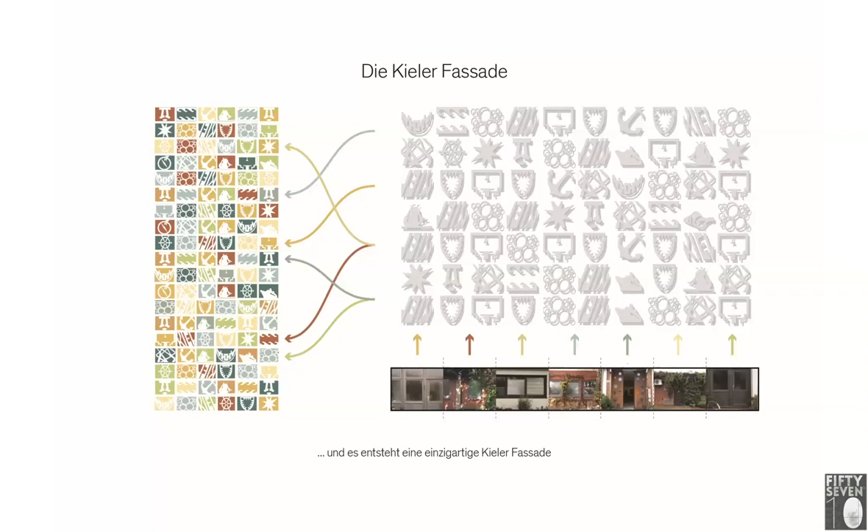We also sent them a facade with the same idea. There's a creative factory we got from every creative there, and we made a facade panel. We said, okay, you can have like 25% facade panels, 50%, maybe even 75%. To our great surprise, they actually went for the most radical solution. Sometimes that helps strategically, showing the alternative. And then this tower, they actually wanted it.

We had this idea that they could ask the people of Kiel which option they wanted, Jenga 1, 2, or 3, and then the city decided, let's go for the most radical one because it's going to be a really wonderful building. So that was a really good way to do it.

But still, we work and the architects decide what's good for the people. So here we try to make this differently, because with software in the future, perhaps everybody could live in a fully customized apartment.

We customize many things already in life, and perhaps in the future it's possible to also have a customized apartment. So 17 students each picked a client with a very big ego, like Marilyn Manson, a desperate housewife, the guy from The Big Lebowski, and so on. Really different characters, and they had to design their dream houses with good arguments why they look like that.

All they had to do is work with pixels, so that we could combine them in some way with the software. And then we start with a very rational shape for this building. In yellow, you see the flat of the guy - The Big Lebowski - it had one of those bowling alleys in his flat. So that was important for this person.

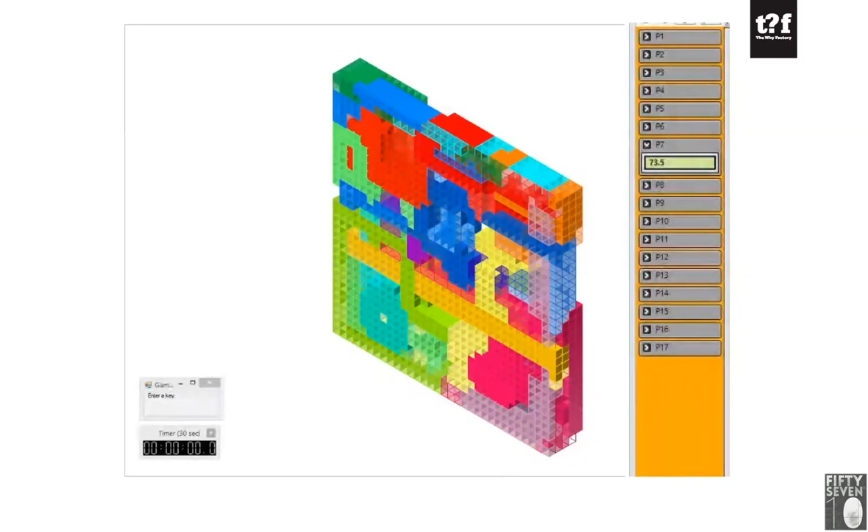And then the software is mediating between all these individual wishes, trying not to diminish them, trying to respect everybody's wish. In the end, it turns out into this very efficient tower made out of voxels, respecting everybody, and fully customized. So this is how it looks like.

You see it's super radical because we have a roller coaster, a climbing wall, all kinds of things that couldn't be done in reality. But in reality, this is not as far away as you might think. All we need is for construction prices to go down a bit, perhaps.

In any case, we were lucky enough to build a prototype at Eindhoven Design Week. Students lived in it for one week, which was really cool. They had lots of visitors every day, and at night they actually slept in there with sleeping bags and so on.

Last project, we still have a little bit of patience. I want to show you what we did in Rotterdam recently with an art depot. We have this museum which was founded by people that got rich in the port, and they all had different collections - one would collect furniture, another classical art, another modern art. Through the years the collection's in danger, so the city gave some money to build an art depot.

And with the art depot, there was actually enough money to build one of those boxes, probably next to a Lidl on the outskirts. The director said that's really bad because this is the collection of the people of Rotterdam - they can never see it. Why don't we build an art depot in the city center, right next to the museum?

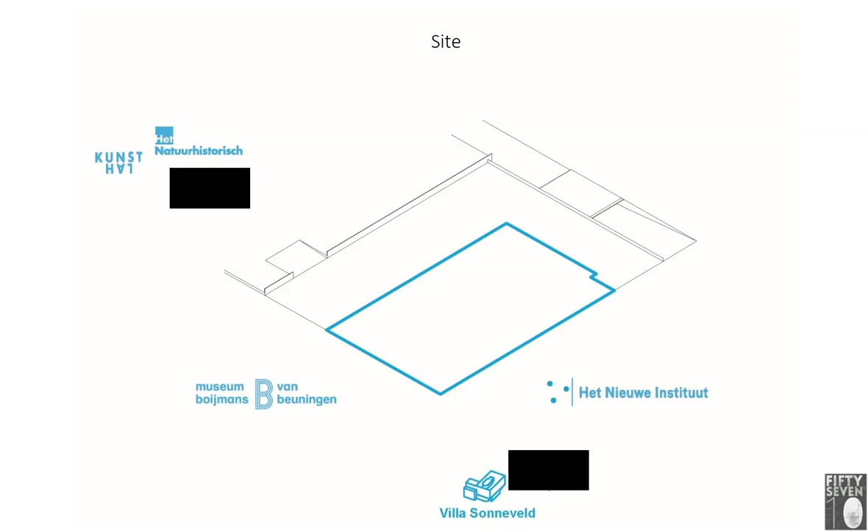So they were all against it. We also had lots of neighbors - a hospital, museums, and so on - so in that sense too, who do you face? Well, we start with the site, which is here. There's a bicycle path, always very important in the Netherlands, so we had to keep that free, and the site got a bit smaller.

Of course, we couldn't build a basement because it's so wet there - it's right next to the museum, so that would flood somehow. And we had a really big program, 15,400 square meters. What an enormous building.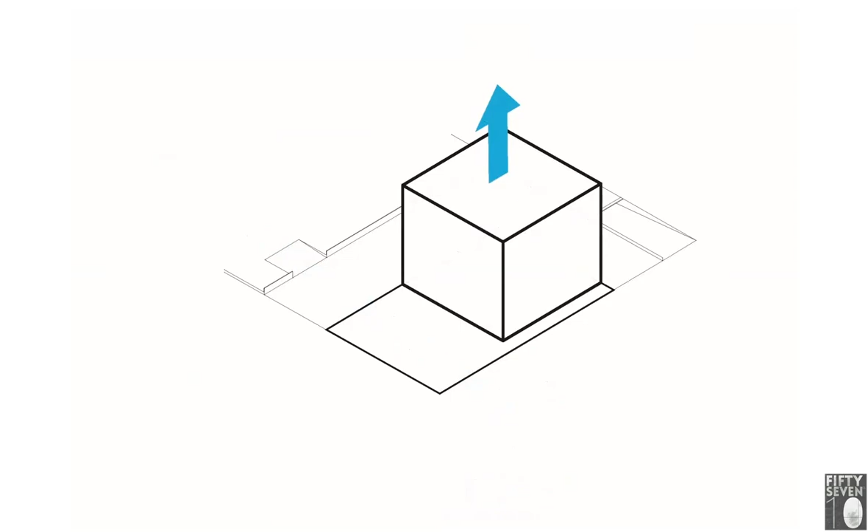Our first idea during the competition was to have a table that would be safe. The art is hoisted up in security, and it would be symbolic for the safety of the art - because maybe one day the Netherlands will flood and then the art is still safe up there. You don't have to do anything.

But then in this competition, the budget was a really big issue, because the moment you would go over budget, you would be disqualified. So every design we sent to the cost consultant, they sent it back and said no. Whatever we did, it was always no.

Until one of our architects actually looked at this and said, what's really expensive in this building? Well, first of all, the MEP, of course. We have 7 climate zones in this building, so that's something we cannot change. But we also had very heavy security walls, so secure that you need to hammer with an electric hammer for 5 minutes before you even have 1 centimeter of way in there. So that was super expensive.

And if you look at this cube, how can you reduce the facade? Of course, the easiest thing is to come up with a cylinder, then you have much less facade. So we sent the cylinder to the cost consultant, and for the first time they said, yes, cool, that works. Actually, you're quite below budget now, so you can start to design.

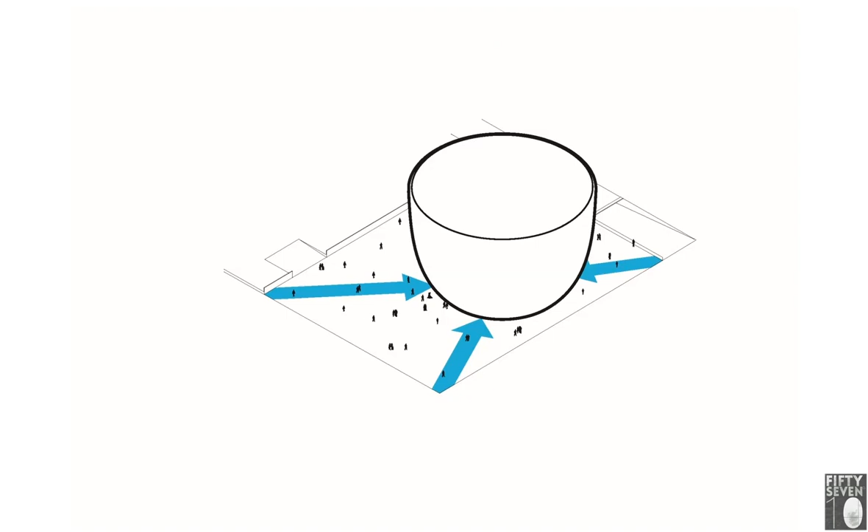So with this given, that we had this cylinder, we then could actually start the competition for real and work on this art depot. First of all, we made the bottom smaller, so to destroy less of the park in a way. And we actually have a 10-meter span, so the top is 20 meters wider than the bottom, which is really nice.

That makes room for a really big public space on the roof where you can see the city of Rotterdam. And the idea was also that you can see it for free, because all the other places in Rotterdam where you can go up, you have to pay. It also solved a problem with the neighbors, because they all see the same building from every angle. Nobody is looking at the backside of the building. They all look at exactly the same thing. It sits like a sculpture in the park.

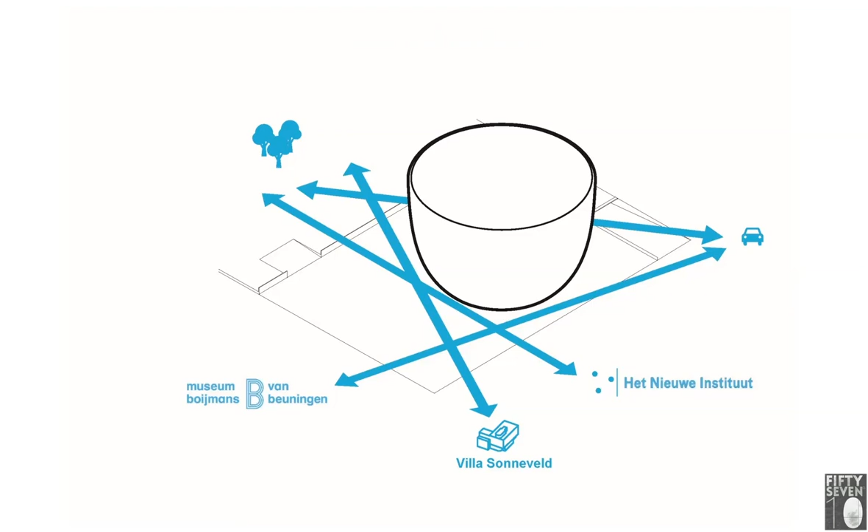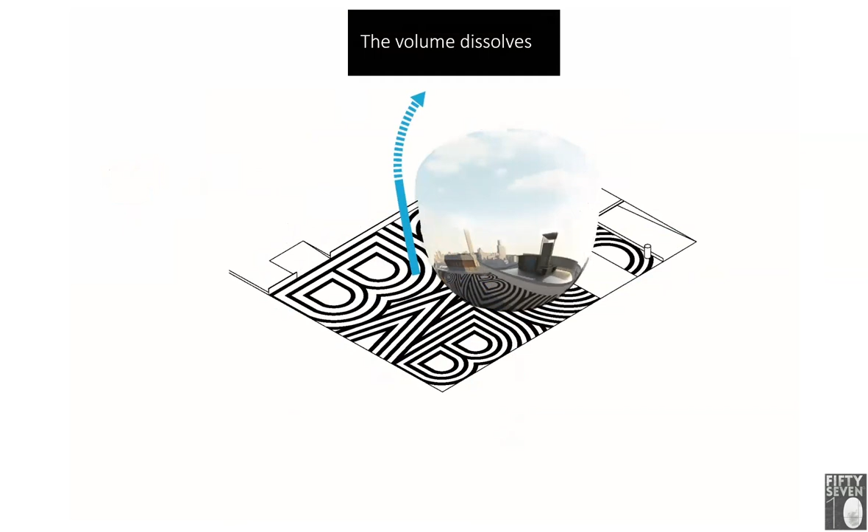And then we thought about sculptures, and what about the Millennium, this bean in Chicago? What if we actually cover this building in reflective material? Then instead of seeing the building so prominently, because it's really big, maybe you see yourself, you see the city, you see the sky, and also the building, of course. Also funny is that you can look around the corner, so you can actually see things that you couldn't see without this reflective material. And towards the top, the volume actually dissolves because it takes on the color of the sky.

At night, there are few windows, because you don't really need windows in this. I was today at the V&A in Dundee, and you also see that they have their shows. Also, we have this, and the reflective material actually makes the facade quite alive, even though there are hardly any windows in it.

Now, we had the problem with trees. They were all dying, because it was so wet, so they took away the trees under a lot of protest, but they were all quite sick. The trees are in a tree asylum, recovering.

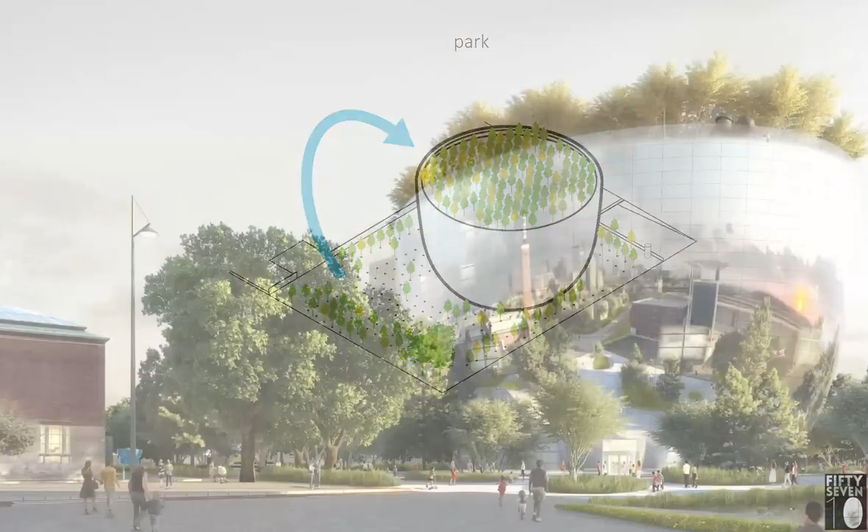The idea was that we would actually compensate and put trees on the top. Problem was, these trees wouldn't survive on the rooftop, so we had to work with birch trees that were then prepared, and they had 5 years of growing time to be prepared for the roof. This is how we then won the competition with this kind of image.

And then we had to actually build it, which is nice. We started with casting on site for the lower levels. It's really crazy because you have huge doors, of course, and they're secured, but they're not as safe as the concrete, so we still had to work with all this big concrete. That's the regulation from the insurance company. It's also good energetically, because the air conditioning in the building is not changing, or like the climate.

On the higher levels, we could actually work with prefab, so that was friendly to the budget. They were made in factories and then brought to the site, put together. The lower part, you see the insulation in black, so it's heavily insulated, because inside the temperature can never change. The air quality needs to be absolutely perfect, so these big walls actually are quite helpful.

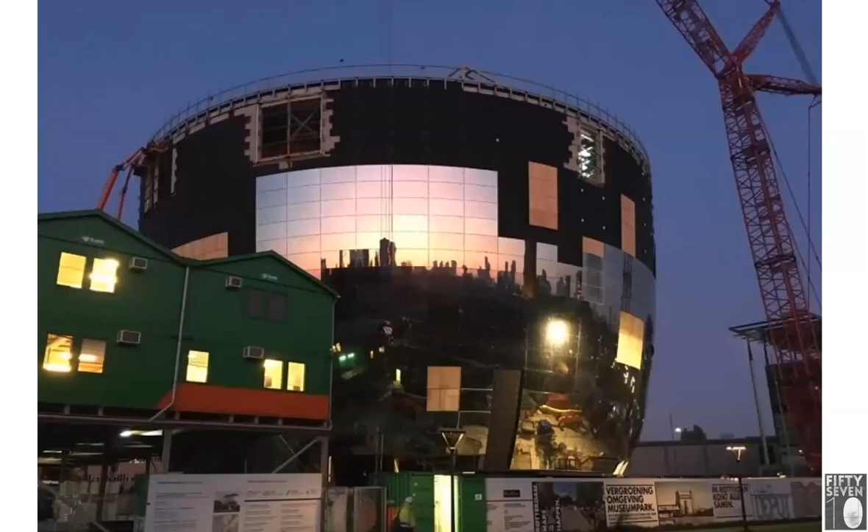And then at a certain moment, we were putting the double bent glass panels, which are also reflective, onto the facade. And then for the first time, you could see in Rotterdam the sun come up, not in the east, but in the west.

Looking west, you see the sun come up, a bit of the facade of the skyline. This is how we recently completed it. Then they needed first half a year to dry the building, so that all the systems work and the art is safe inside.

Once they had reached that point, they actually started to move the art in, and that was another half year. So a year after completion, the building was still not open to the public because of the movement and the drying.

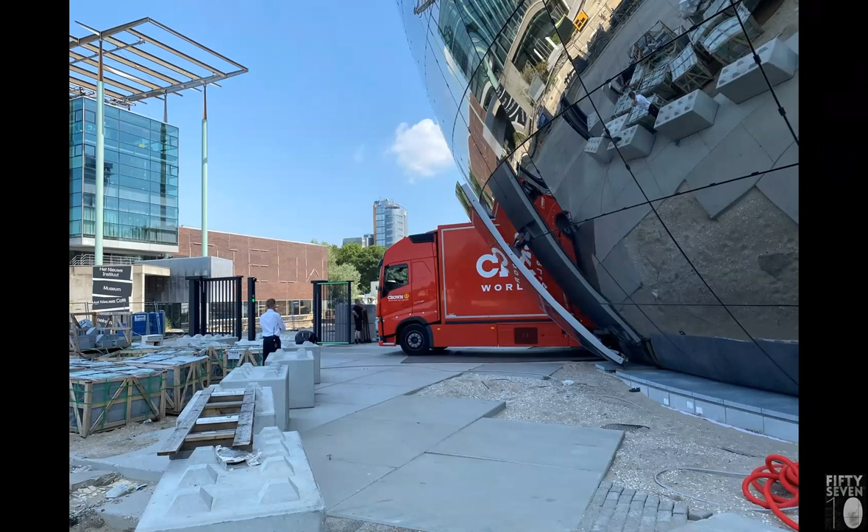Now we have the loading dock, which is one of the few places that's not open for the public. The lorry can totally disappear, and you see the big door, it's like a bus door, these doors that totally close. At night the building can be totally round and without any doors - you don't see the doors.

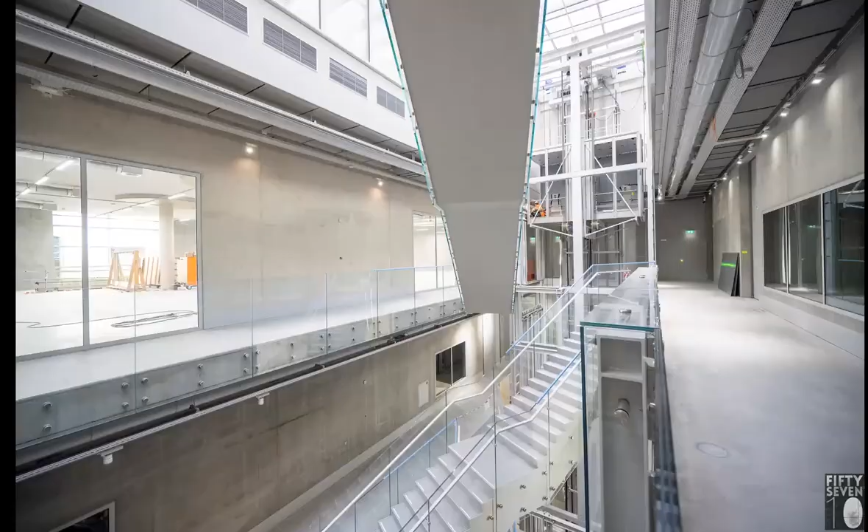Inside there's this big atrium, you can walk around it. There's a bit of daylight coming into the building, which is good. Then you have these shop windows towards the depots, so you can look in.

Something super interesting happened - they devoted one floor only for private collections to earn a little bit of extra money. One of the big phone operators of the Netherlands rented a space, 500 square meters, and here you see their collection. It's a really good collection, a lot of photography, digital art, and every time you go in there it's different because they start to manipulate these racks.

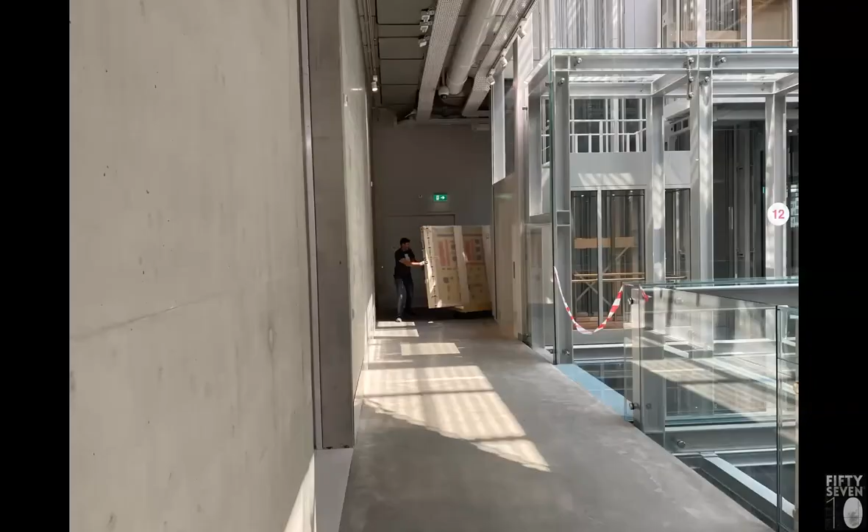The museum itself has the most space, and here you see one of the depots. What's really nice is that the art is not put in per period, there's no curation, it's basically practicality only. Also super cool is that the art and you take the same route - there's no separate art transport and people transport. It's all the same, because you're in the art depot.

So here we walked through, and at a certain moment there was this priceless Mondrian painting coming at us, and we had to make way for it on its way to the depot, which is really cool. Here you see a wood depot with lots of wooden objects, put in there because of their needs for air conditioning and their size, which is really cool.

And here you see how you can go in there. You can go into a depot for 10 minutes with 14 people - 2 of them are from the museum, so you have a guide and a security person. Then you can basically stay 10 minutes, and in these 10 minutes, you breathe a lot.

The condition of the air is not getting better inside the depot. After 10 minutes, it's enough - everybody has to go out, and the air has to recover from this visit. Maybe you have heard about the graves in Egypt and how tourists actually sweat in them and destroy them. Of course, here they cannot have this.

So since recently, you also have to wear a dust coat, so that everybody looks like they're working in a laboratory in this place. What's really cool is that you see art together and objects - here you see chairs and a piece of modern art that you would never see together in a museum. So it's not a museum, but it's a totally different experience.

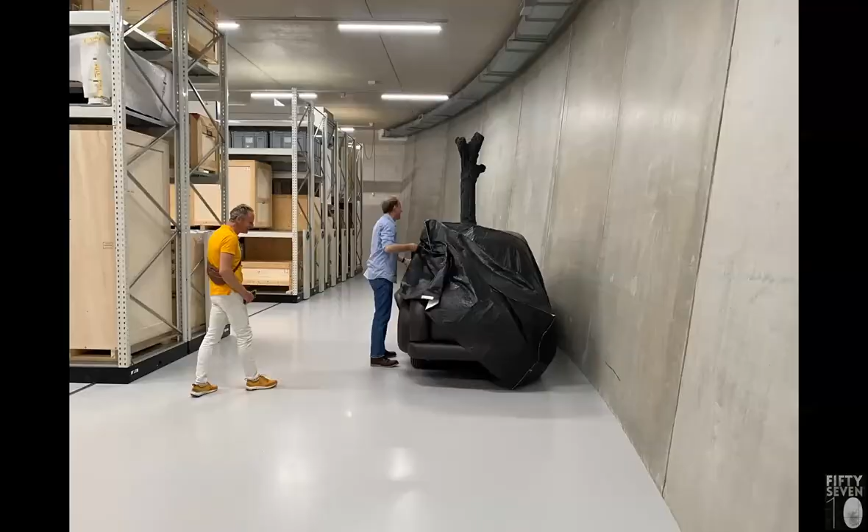Also nice that you can actually - this guy was interested in cars, so the curator removed a bit of the plastic so he could see this art piece. It wasn't to his liking because it was made out of couch leather, so it's a car that is not really a car, but it's a visit that this man will certainly never forget, because this was especially done for him.

And if you then walk through there, it's like being on TikTok, and it just comes at you - crazy amounts of art. You can walk in 10 meters through the entire European art history.

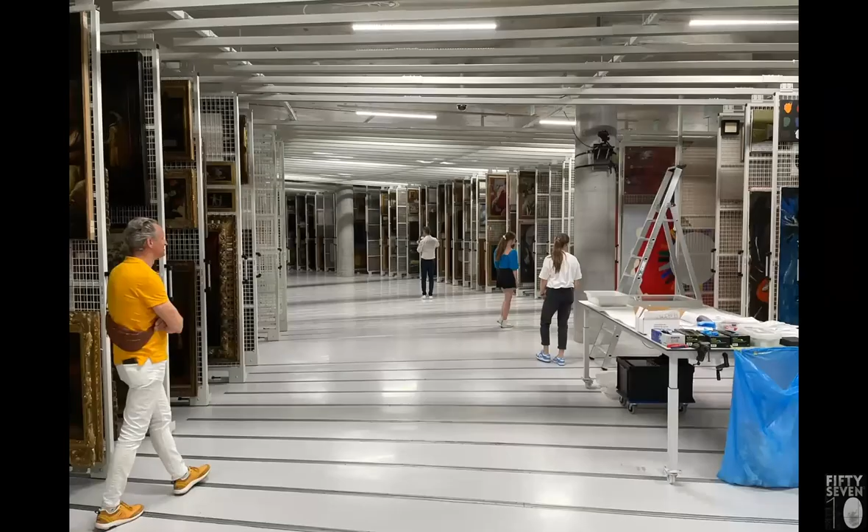Funnily enough, I believe the classic art pieces, with their golden frames, create their own context, while modern art sometimes has this feeling of a charity shop, which is really, really strange. But everybody has a different experience, and walking there is super nice.

If they're nice and you're interested and maybe have a request, they can actually help you a little bit more personal, so they can open the rack and you can see what's on it in more detail. Here, for example, they opened this rack and there was a Monet hanging.

This lady had a lot of fun with the Monet, it was her personal date with Monet. You see, it just comes at you, there is so much, and it's totally different. The family really appreciated this painting, and the guy talked a lot about it. It was not part of the collection in the museum. So you see that suddenly all this art comes to life, it is being looked at, it is being valued.

Also here, I thought that was really amazing. That was a nice experience for me, because you have this Hendrick Avercamp painting, which just hangs there like it's no big deal. But in the Netherlands, during Christmas, you get these Christmas cards with 17th century leisure moments on the ice, and that's actually part of this. Quite a few of his paintings have been used for these Christmas cards, and I thought it was amazing.

You can also see art from below, from above, and from the back, and that's also really cool. Here, for example, you see a painting from the back. It has a few stickers that say where it used to be in exhibitions, and you also see the signature and the title of the artist. Very precise artist, she painted very detailed and neatly, but on the backside it just... that was a surprise to me, that she didn't care too much about this.

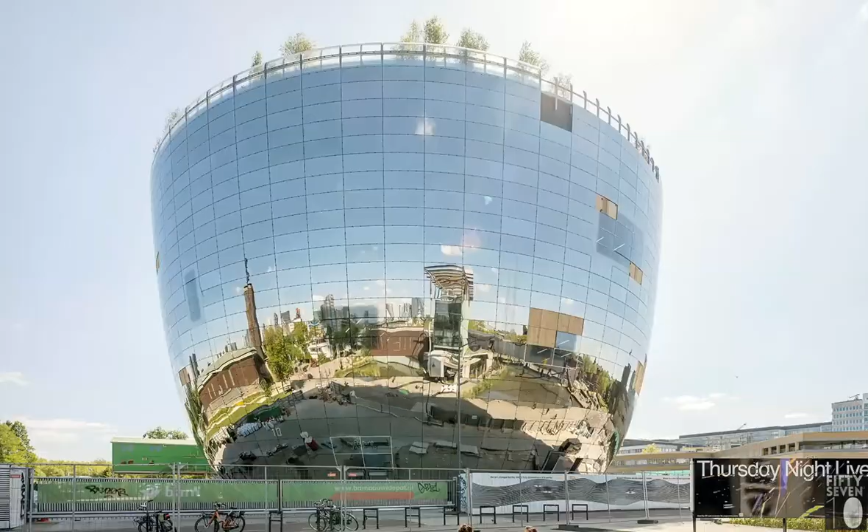Right, so this is it. What's so nice about this is it's not a competition for the museum, but it's rethinking typologies. I think this is something we're trying to do all the time in an increasingly complex discipline. Architecture used to be much easier than it is today.

You have all these stakeholders in this building process. They come from every side: sustainability, engineering, public participation, all kinds of other things. They all hit you, and the architect needs to be this person in the center. By doing all this, it becomes very easy to just give in and make a blunt box because maybe the market demands it or whatever. But you see that we are trying to fight a lot, and we are trying to be better.

Our clients usually tell us that they don't like the process because we talk a lot, we test their ideas, and we try the impossible. Afterwards, they're usually super happy with us that the building was realized, and they come back. So we have like 40% of returning clients, but that doesn't mean that if we make one project successful with the client, the process next time will be much easier.

No, all these forces still come onto architecture, and I think one of our ways to deal with it is that we are trying to combine things like apartments and a market. We always want to think about what can a building also do, and a very important question is, what does the building participate on an urban level, and how does it improve society?